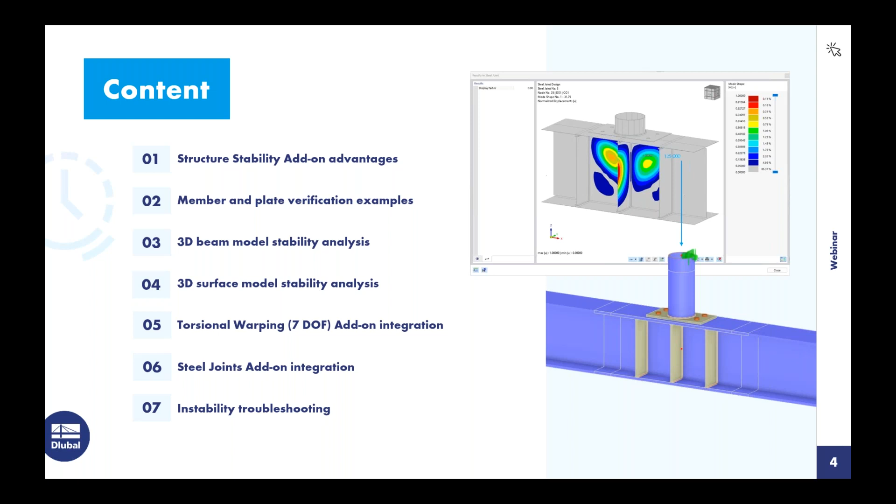So to begin, when looking at the structure stability, this is an optional add-on within the RFEM 6 program. This allows us to run an eigenvalue analysis to determine the critical load factors and eigenvectors, or in other words, the buckling modes of our structure. Therefore, we can evaluate the stability of the structural system in regions prone to buckling. So when we're talking about regions prone to buckling, we're typically referring to very slender beams or columns or thin-walled shell or plate elements.

Now, everything that we'll be carrying out today will be according to a linear eigenvalue analysis, which we'll talk a little bit more about in the next slide, but keep in mind that a nonlinear stability analysis is also available where we can actually increase the load increments to see the failure of the structure. As already mentioned too, not only can we look at the buckling modes of the structure, but we can carry out instability troubleshooting to locate modeling errors with a load-independent eigenvalue analysis.

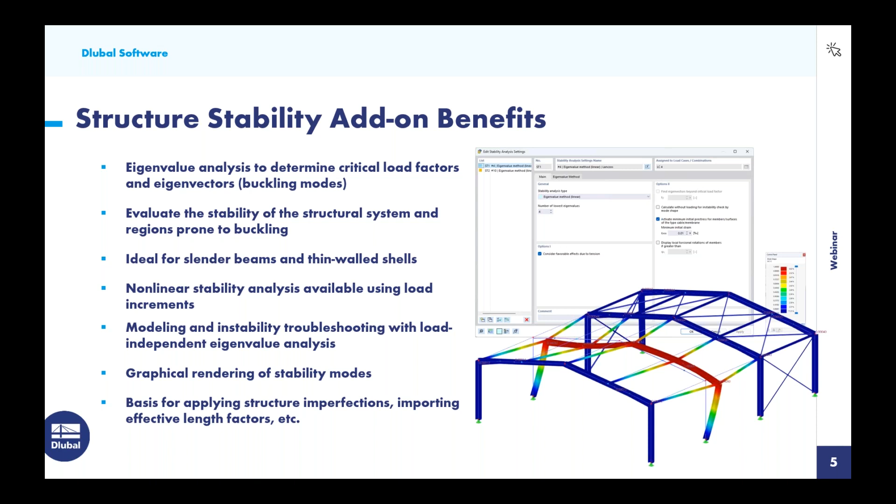Now, of course, through all of these examples we'll see, we'll see the graphical rendering of the stability modes as we see over here on the right-hand side. Then we can integrate for further capabilities within the static analysis, such as applying structure imperfections. We can import effective length factors, and we'll see those carried out in the further design examples.

Now, when we do activate this add-on, we have 3 analysis types available to us. The first is the eigenvalue method, or a linear analysis. This is essentially where the buckling modes are determined through a linear method. If we have any nonlinearities defined, either material or geometric nonlinearities within the model, these are internally converted to linear elements in order to carry out the stability analysis with constant stiffnesses.

Now, alternatively, we do have the incremental method with an eigenvalue analysis. This is nonlinear and will take into consideration all geometric and material nonlinearities. Essentially, we will carry out the failure criteria and nonlinear effects, and these will be included during the incremental loading increase. We will find the last stable state with this nonlinear analysis to carry out the linear stability analysis, or the eigenvalues.

The third option here is the incremental method without the eigenvalue analysis, also nonlinear. This is identical to option number 2 with that nonlinear analysis capabilities. We simply won't carry out the eigenvalue analysis within that last stable state. So with all of our examples today, we will be utilizing the linear eigenvalue method, but keep in mind if you do have those nonlinearities, it's capable within the add-on to also utilize these nonlinear options.

So as we look at this example within RFEM 6, our main base program, we can see this W section profile with the 100 kip load applied at the top, the pin roller type scenario, 12 feet high. We want to activate the structure stability add-on, which we can do within our toolbar by accessing our base data, or by right-clicking on the model name to access that base data dialog box. Under the second tab are all of our available and optional add-ons, and for today we're going to be utilizing the structure stability add-on.

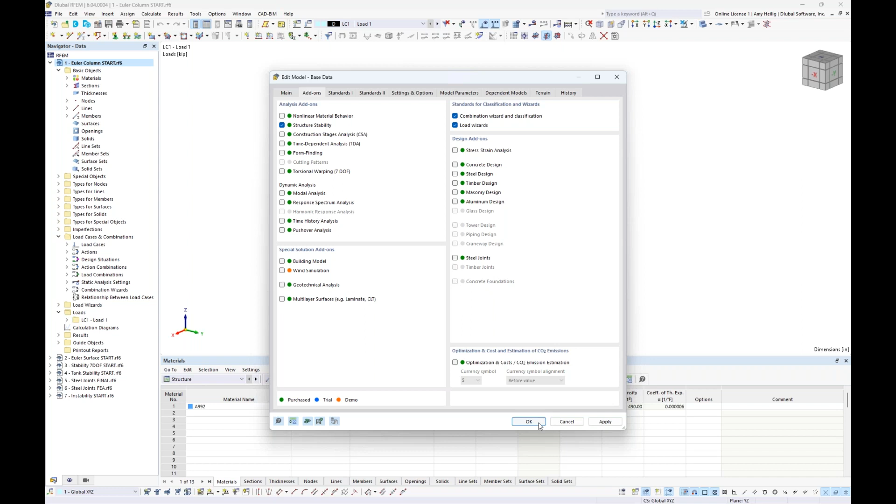When I click OK, pretty much nothing changes within the model itself, but we can go into the load cases and combinations dialog box. I currently only have one load case defined with that 100 kip load applied at the top of the column, and this will be carried out according to a first order static analysis. But we can activate the structure stability add-on with this checkbox down here at the bottom.

Looking at the default definition types, you'll notice there are two definition types immediately set. The first is an eigenvalue method linear analysis, which we should recognize from the PowerPoint. We'll go ahead and carry out that linear analysis for today, and then we can set the number of eigenvalues to solve for. The default is 4, but we could increase or decrease this depending on our model. The second default setting is identical, just with a higher number of eigenvalues set to 10 by default. So carrying out the linear analysis with 4 eigenvalues, we'll go ahead and click OK.

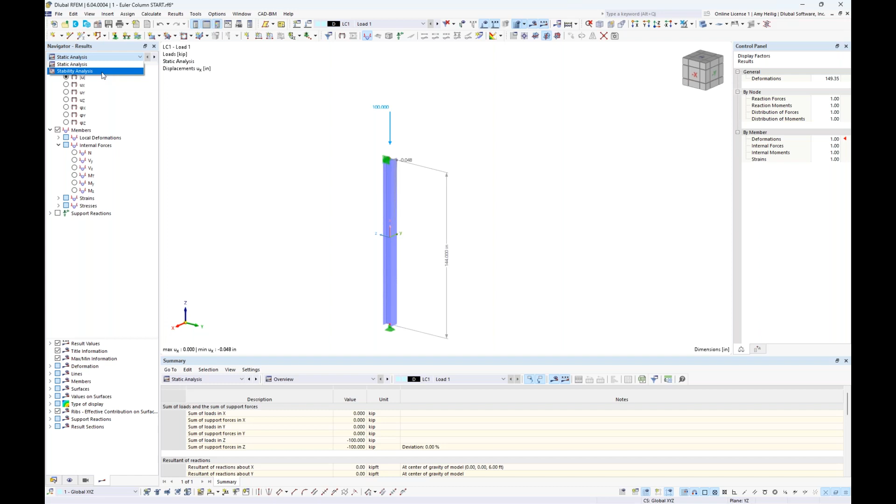To run this calculation, we're going to initially calculate the static analysis with this first load case, but then you'll notice that we carry out the second calculation for the stability analysis. We're not so interested in the static analysis results, but immediately we jump to the stability analysis results that are now available to us in our navigator.

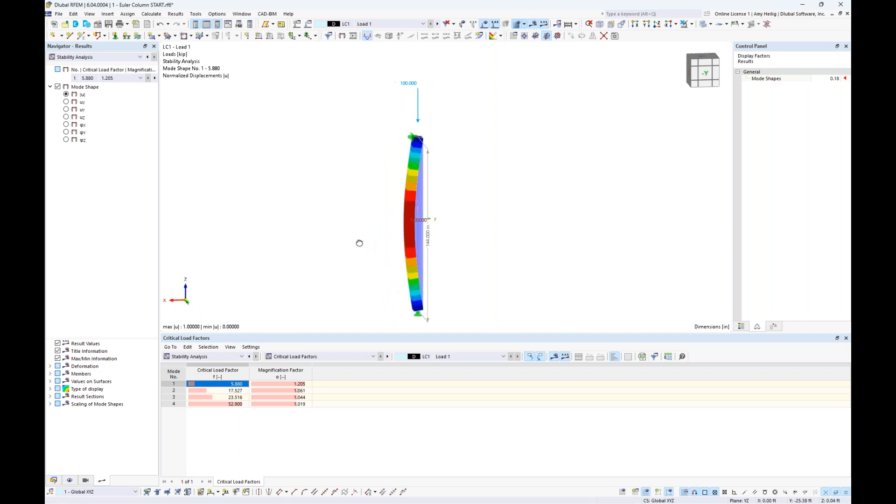When we look at the results for the structure stability add-on, we see 4 different eigenvalues that we have solved for. Within the table, we'll also see the critical load factor given. The critical load factor for this first buckling mode shape, which we can see is buckling out of plane in the weak axis direction, is the factor we can multiply the applied loads by - in our case 100 kips - before we are going to see the structure fail, as shown with this first buckling mode shape. The second mode shape is buckling in the strong axis direction, and as expected, we see a higher critical load factor of 17.527.

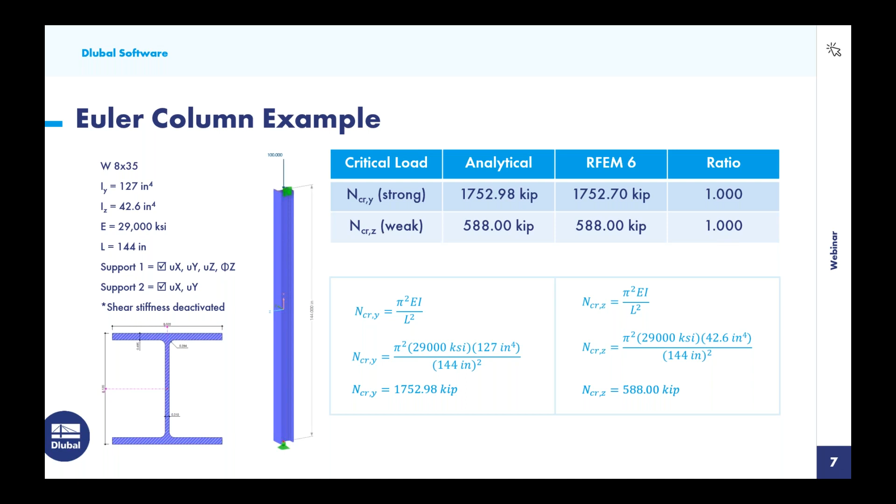Again, we multiply this factor by the 100 kip applied load in order to determine the critical buckling load. So we take this information back to the PowerPoint to compare to the analytical calculations we've carried out within this slide, and we can see that compared to the Euler buckling formulas, the RFEM 6 comparison gives us a ratio of 1.0. I think it's important to understand how we're carrying out this structure stability for simple flexural design here for the stability modes.

Moving on to our second example, this is really very similar to what we just saw with our column, yet this time I wanted to utilize a 2D surface element. Members by default are represented by a single line element. Surfaces, on the other hand, are two-dimensional.

So we go into RFEM here to open up this example. As mentioned, this is a two-dimensional surface, so we have 10 inches wide, 50 inches tall. I have left on the display here the FE mesh, so you can see how the structure will mesh this for this two-dimensional object. We also have a 1 kip per inch load applied at the top here.

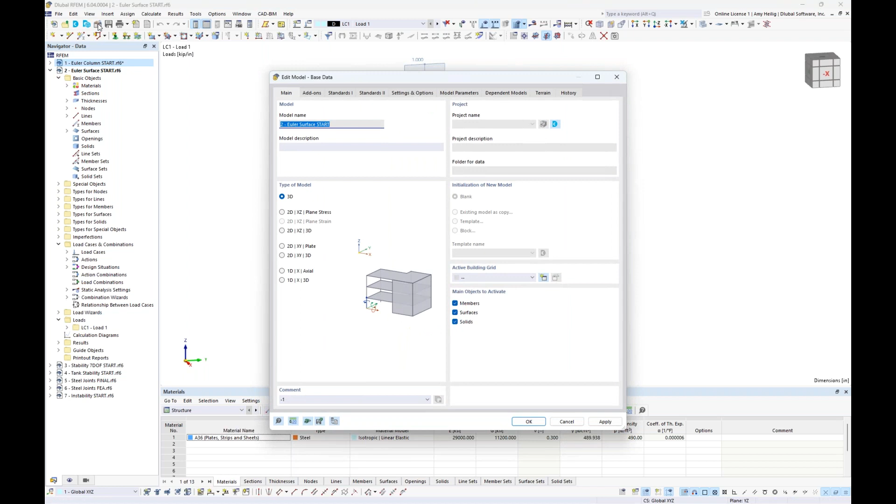So very similar to the column, we want to go into the base data, and we can do so within the toolbar directly to activate, under this second tab once again, the structure stability add-on.

We go into our load cases and combinations. And for this example, we have our single load case here with the 1 kip per inch applied as a line load at the top of this 2D surface element.

We want to not only carry out the static analysis, but also the structure stability analysis. We'll go ahead and leave these default settings here for a linear analysis, carrying out 4 eigenvalues, and we can run this calculation. So the program would initially mesh a structure if we didn't already have it, it will carry out the static analysis, and then we move on to the stability analysis.

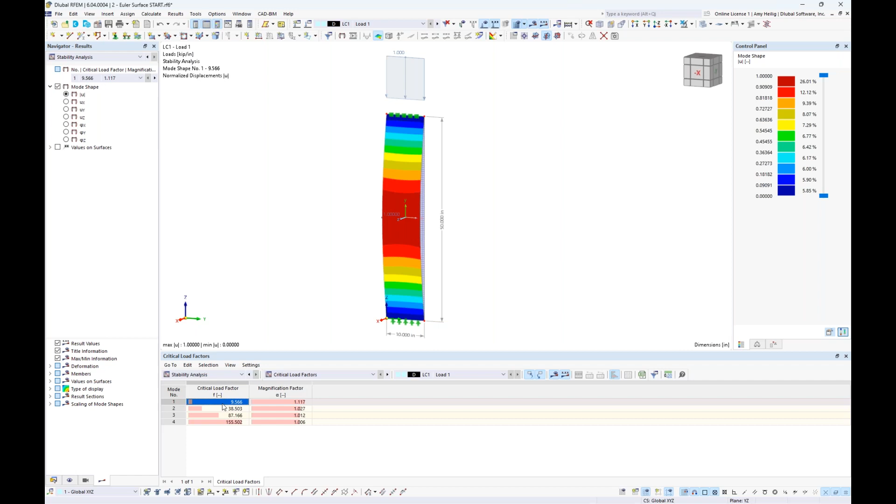So taking a look at our stability analysis results here within our dropdown, we see our 4 different mode shapes. And the first mode shape you can see here is buckling out of plane for this 2D surface element, with a critical load factor of 9.566.

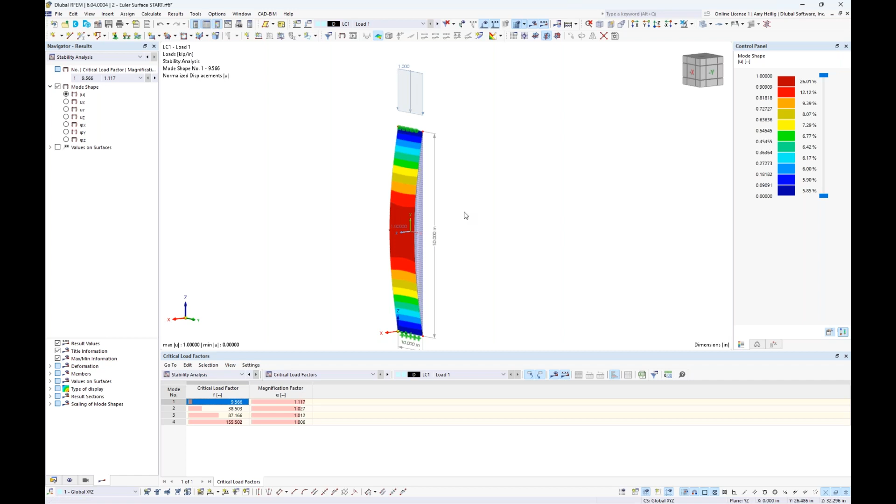So taking a look at these additional mode shapes, we can see here the deflected shape, but the critical load factor here is much higher. So in reality, we're most concerned with the lowest critical load factor. Now again, this is the factor, this 9.566, that we can multiply the applied load here of 1 kip per inch before we would expect to see structure failure, or the buckling here out of plane.

Again, we take this information back to the PowerPoint here to compare to the analytical formula, and we find a ratio of 0.997. Okay, so that should give us a better understanding then of, again, just the basic behavior of this structure stability add-on for a simple beam and a simple surface.

Now let us go back into RFEM here to open up our third example. So this one should be a little bit more interesting, where we have a 3D structure that is composed entirely of beam elements. So you can see that all of these are member elements for our columns, beams, braces, represented by a single line element here. So no surfaces for this particular example.

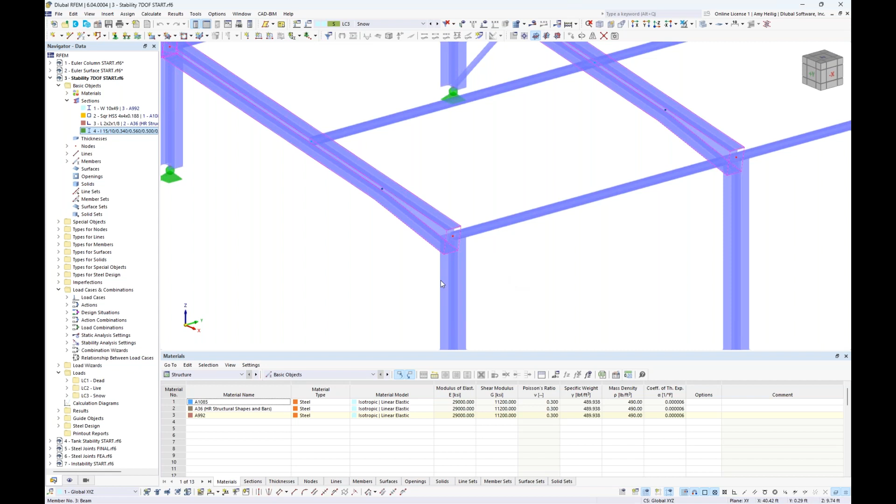If we want to do a quick overview, the cross sections are from the AISC database. So we have W10 by 49s, some square HSS sections spanning between these moment frames, single angles for our cross braces here, lateral bracing. And we also have a very small taper for this beam member, in particular at 25% of the member length before it frames into the vertical columns.

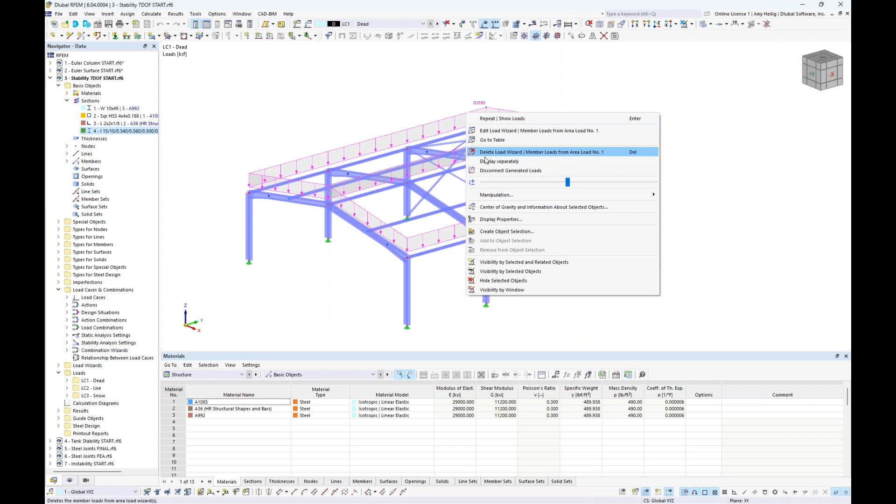Now, to quickly take a look at the loading for this example, I have only 3 load cases defined. So we can view these loads here, and these are just general area loads created with the load wizard for dead load. If we're curious to see how the load distribution looks, we can right-click to display separately, and notice that I have created a one-way area load distribution so that the loads are mainly on these main beams here rather than the HSS spanning in the global Y direction.

We can also view here the live load, same concept. If we want to view the area load instead, we can see this shown here on the structure with a varied magnitude.

And finally, we have a projected snow load in the vertical direction. So for this example, I have applied only gravity loads.

I think it's important to understand that when we're talking about the buckling behavior of our structure, we want to evaluate the worst case scenario where we have the highest compression forces in our members. For example, in our column elements, we want to see the highest forces acting in the downward direction. This is typically with gravity loads.

If we were to include, let's say, wind uplift forces, this is only going to do us additional favors in terms of the buckling behavior, because now we have introduced additional tension forces in those members. So again, when we are evaluating the structure stability, we really want to look at those downward compression, possibly gravity only loads. Okay, so I have additionally combined these load cases into load combinations according to the ASCE 7.

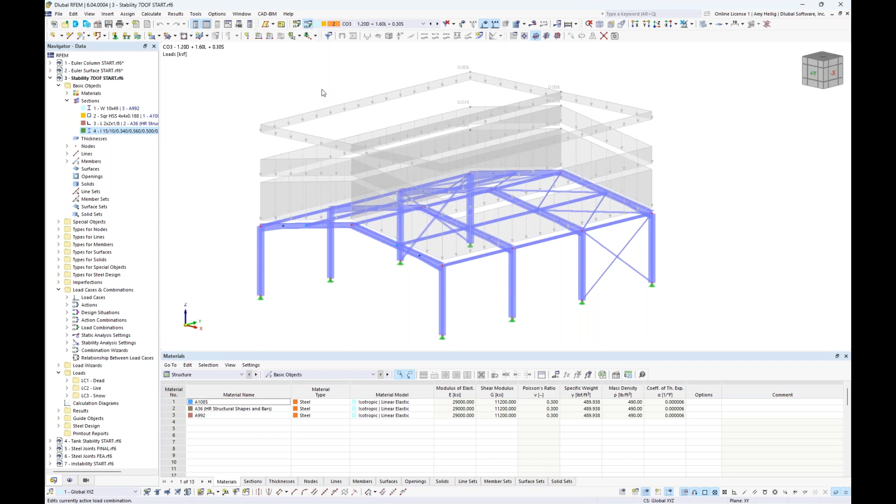We can see those displayed here graphically along with the relevant load factors. I'm going to go into my load cases and combinations. Now, we certainly could activate here the structure stability for each individual load case, as we did in our previous simple examples. But instead, I'm interested in carrying out the buckling analysis for my load combinations instead, where I have combined all the load cases together.

Now, the program by default creates 2 design situations based on the ASCE 7 2022 in this example. You can think of a design situation as simply grouping together all of our factored load combinations. We can see this here, LRFD, according to the ASCE 7, as well as our second design situation, which groups together all of our unfactored load combinations. This will eventually give us an envelope solution for those factored and unfactored load combinations together.

Under the combination wizard settings here, I can go in and you'll notice that everything is solved here for our load combinations according to a second order analysis, but we have the ability to activate the stability analysis here directly within the design situation.

And these default settings are identical to what we saw previously within the load cases, that we can carry out the linear analysis, and perhaps I increase this to 10 different eigenvalues to solve for this structure. So now that I have activated it within the design situation itself, I take a look at the load combinations individually listed out, and I can see now by default that the structure stability add-on is activated here, just because I have activated that checkbox under the design situation itself.

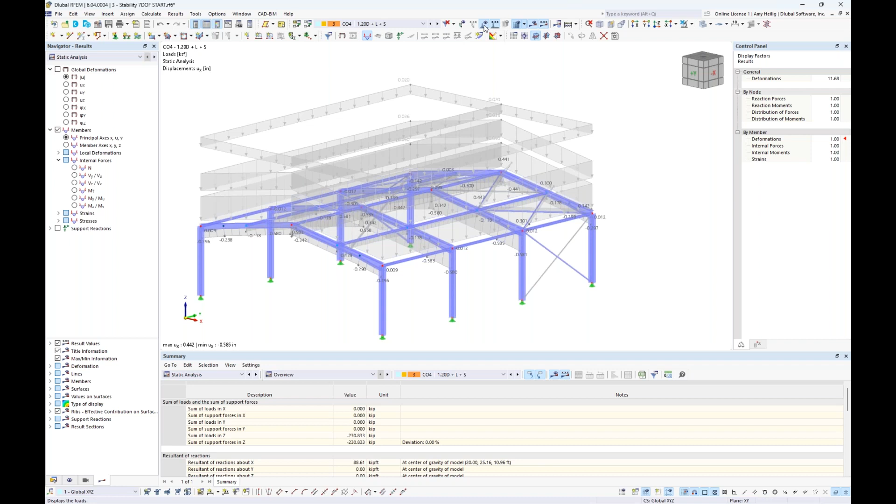So when we toggle this drop down to the design situation for our factored load combinations, again, this is nice because it's more or less an envelope solution for the static analysis. But you'll notice within this table here that shows our static analysis results for this design situation, we have the stability analysis envelope solution as well.

The minimum critical load factor is 10.532, and the controlling load combination is load combination number 3.

So this is kind of nice that, again, we don't need to run each individual stability analysis for each load combination and to manually check the results, but the program will give us the controlling load combination here.

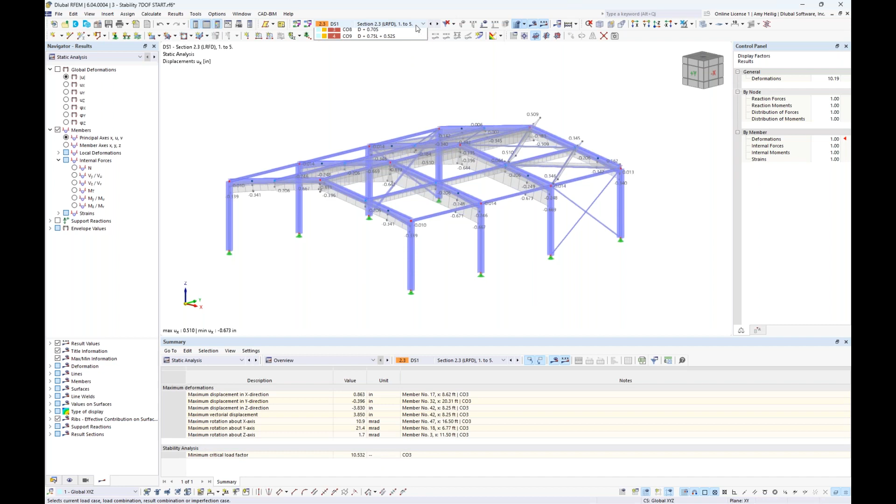So we toggle down just to display the loads for load combination number 3, and no surprise, this is certainly going to be the controlling case because we have all 3 loads activated with the highest load factors to give us the greatest compression forces in our members.

So we will toggle down to the stability analysis results for load combination number 3. As we have input into the program, we had solved for 10 different mode shapes. Starting with mode shape number 1, we kind of see a racking here of this initial moment frame with a critical load factor of 10.532 as we were shown here within the design situation itself. Essentially, we're going to see here the flexural buckling in the strong axis direction of these columns.

Looking at some of the additional mode shapes, we can see similar behavior just in different locations of the structure with a higher critical load factor. As we continue to increase, we may start to see more localized mode shapes. What I mean by this is we see the individual buckling of these columns, in particular in the weak axis direction. Whereas compared to the mode shape before, this is maybe more of a global mode shape that kind of affects the structure together.

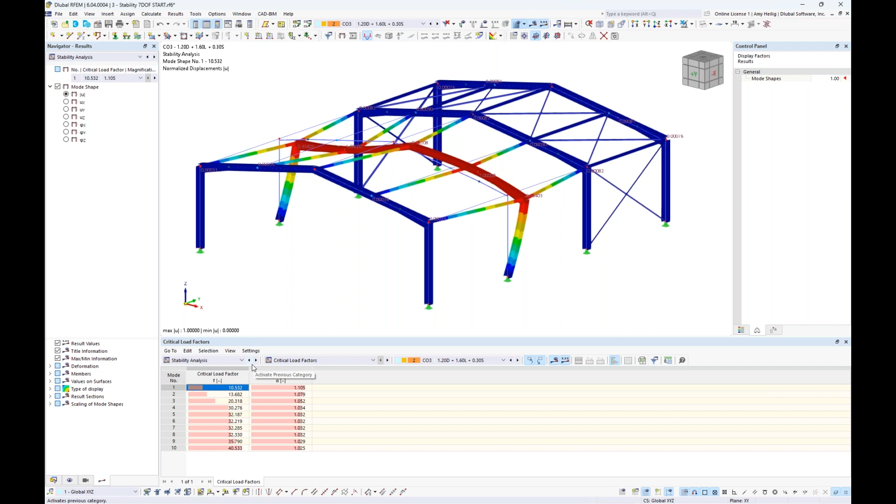Okay, so now that we are looking at mode shape number 1, let us focus in on this particular column here, and this is member number 10.

When we are looking at the stability analysis results within the table, we can use this drop down to view the results by member. So when I graphically click on this member here, the table updates to show me member number 10's results, and we have 10 different mode shapes shown here.

In particular for this first mode shape, where we have failure of this column in the strong axis buckling, we can view the equivalent effective length factor, that K value, which is given as 3.012 in the strong axis direction. We also see here the effective length of 34.64.

So if we plan to take this a step further and design this structure, let's say according to the AISC or the CSA standard, and in particular according to the AISC, we want to design it utilizing the effective length method. The effective length factors are really important, so we have the ability to get that information directly from the failing mode shape here.

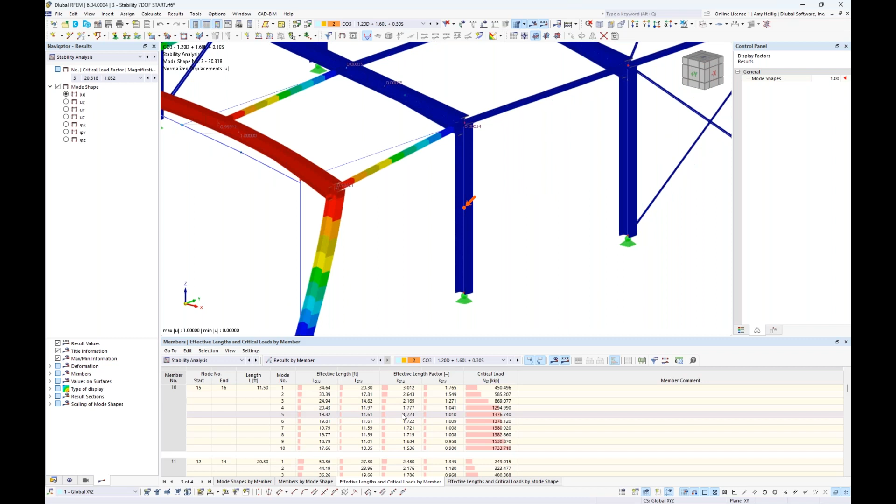Now, when I take a look at these additional mode shapes, they're really not affecting member number 10 until I get down to mode shape number 7. And here we see the failure in the weak axis direction for member number 10. We see the relevant effective length factor in the weak axis direction given as 1.008 and the effective length as 11.59.

So assuming that we have already activated the steel design add-on within RFEM to carry out the steel design according to the AISC, information such as the unbraced lengths or effective lengths are always needed in order to carry out that design. And we do so by inputting in the effective length for the member directly.

And I want to show you a nice feature here that, assuming again that we're carrying out design according to the AISC with that steel design add-on, we input our first effective length definition where you have the ability to import in from the stability analysis.

So when I turn on this checkbox, I get a new tab here where for the strong axis direction, for consideration of, if we go back here to the main tab, flexural buckling about the major axes, we can import in that effective length factor directly from the stability analysis.

So we choose here load combination number 3. We will choose mode shape number 1, and we can either graphically select member number 10 or choose it here within our dropdown, and notice that that effective length factor is automatically brought in as 3.01.

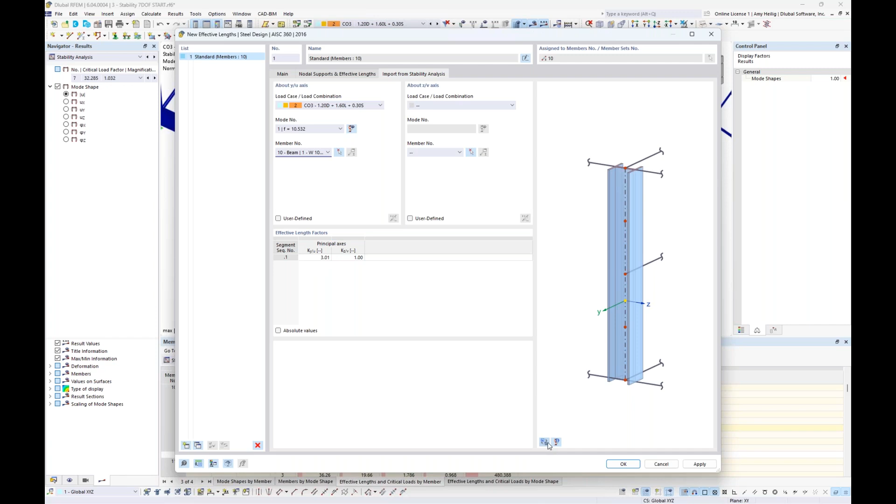We can do the exact same thing for the weak axis direction. Again, this is specific for member number 10. We will choose load combination number 3, but this time we want to choose mode number 7. Remember, that was where we saw this column fail in the weak axis buckling direction, again for member number 10.

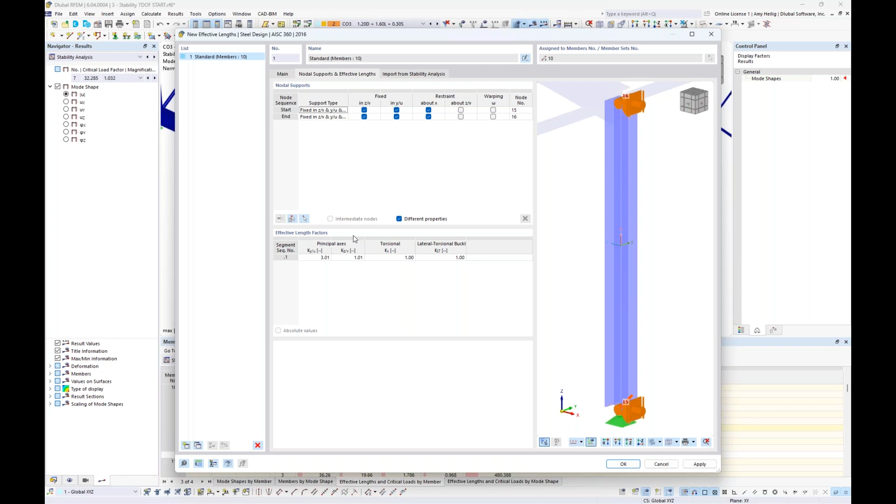And we see that effective length factor brought in automatically as 1.01. So we don't need to do anything further here in terms of the effective length definition for flexural buckling in the strong and weak axis direction if we integrate this with the structure stability add-on.

Okay, so now that we have covered the basic stability mode shapes here, keep in mind that everything we have seen so far has been based on 6 degrees of freedom. And with 6 degrees of freedom in these various mode shapes, we notice that we're really only able to consider flexural buckling. We certainly can see this with the mode shapes directly, with flexural buckling failure of the columns themselves.

But if we back up a step to look at the static analysis results, or the internal forces from load combination number 3, what we'll actually see here is that we have pretty high bending forces along the length of our members. And when we look at our columns, we have pretty high axial forces, of course. When we're talking about these bending forces, for example for these beams, this should immediately flag us that possibly lateral torsional buckling is an additional stability failure state that we need to consider.

So let us go back to the PowerPoint here to discuss these different stability failure modes. Now, we should be very familiar with flexural buckling by now for our members. Ultimately, there's some critical buckling load for the strong axis and the weak axis before we see this member fail with flexural buckling.

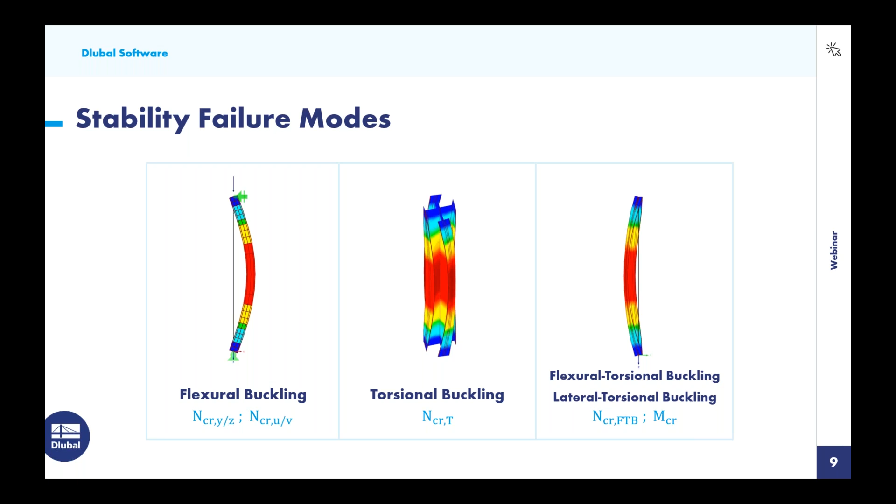Now, if we're designing according to AISC or CSA, those codes have analytical equations that design for these additional stability failure modes. But this is in the design process. What I'm talking about specifically is the static analysis as well as structural stability. So how do we consider these additional failure modes? The answer is to enable the 7th degree of freedom, or warping.

We have an additional add-on within RFEM 6 called Torsional Warping 7 Degrees of Freedom. This allows us to consider cross-sectional warping with an additional degree of freedom for member calculations. What's nice is that everything is integrated automatically, including both the static analysis and the structural stability add-on, to determine additional member critical load factors and mode shapes.

So again, 6 degrees of freedom can only consider flexural buckling failure—that's everything we've seen up until now. I did want to note that with 6 degrees of freedom, the load application is always at the member shear center. So now when we enable that 7th degree of freedom, we can additionally capture torsional, flexural torsional, and lateral torsional buckling behavior. And when we enable that 7th degree of freedom, we get a load application at the center of gravity, or centroid, of the member instead.

What we'll see in just a minute is that when we enable this add-on, we get additional options available, such as member transverse stiffeners to restrain the warping along the member length. Now, currently in RFEM 6, the 7 degrees of freedom is not linked in the steel design add-on when carrying out steel design according to AISC or CSA. It is currently linked for Eurocode only. We do plan to link those in the future, but currently the full static analysis and structural stability can easily consider the 7 degrees of freedom, which we'll see in just a minute. So keep that in mind if we're taking it a step further with the steel design add-on.

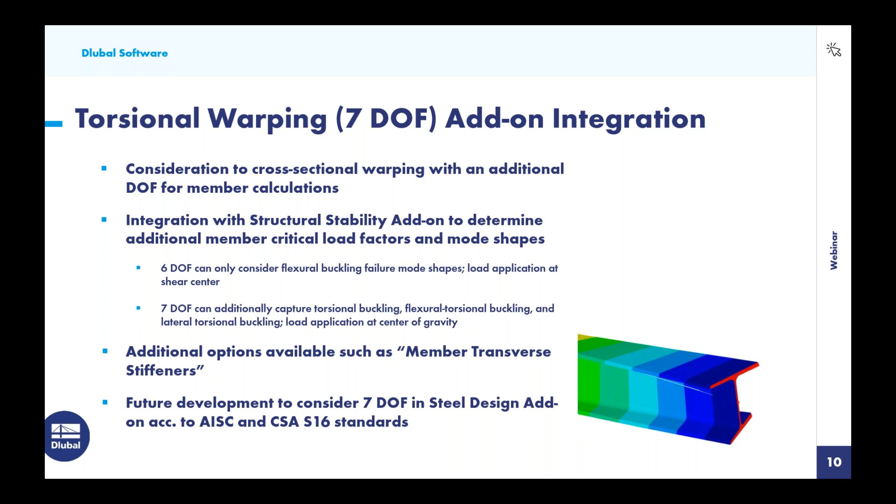Okay, so what we'll do here is go back to the RFEM model and go into the base data. Under the second tab, we'll activate not only the structural stability, but the Torsional Warping 7 Degrees of Freedom. When I do this, the program says it needs to delete the results, of course, because those were all based on 6 degrees of freedom.

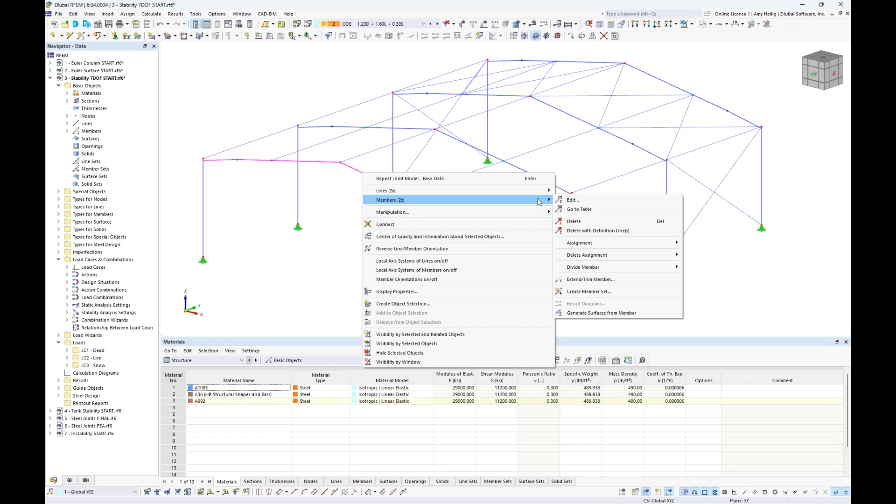Now, by default, all of our members are considered free to warp—there is no warping restraint along the member length. In addition, if you'd like the warping internal forces to be transferred to adjacent members, it's important to create what we call a member set. So if we want the warping forces with the 7th degree of freedom to be transferred from, say, our beam on the right over to our beam on the left, we'd need to hold down the control key to make sure both are highlighted. We right click, and under the member option, we have the ability to create a member set. That's simply grouping those members together so the warping internal forces will be carried out to adjacent members.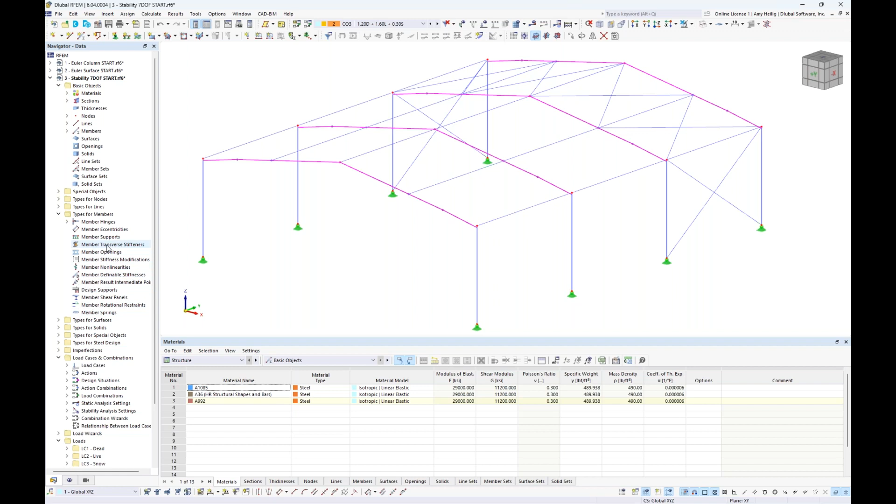Now, circling back to the warping restraints, we should see under types for members a few additional options, including member transverse stiffeners. I'd like to double click on this to create a few stiffener types for these members in order to restrain the warping at the member start and at the member end. And within this dropdown, we actually have several different stiffener types.

For example, we can choose a flat plate where we could input the material and dimensions, and the program will automatically calculate the warping spring to be considered within the analysis. For today, we will use the option at the bottom called warping restraint, where we'll use the full warping restraint and apply this to the member based on a certain percentage of the length.

I'm going to activate this warping restraint at 0% of the member length, at the member start. And I'm going to add a second warping restraint at the member end, so 100% of the member length. Then we can graphically select which members we would like to apply this warping restraint to.

I'll use my selection box graphically here to select all of those main beams. I click OK, and once I click OK through this dialog box, you'll notice we get a nice symbol shown here representing where that warping restraint is located at the member start and member end.

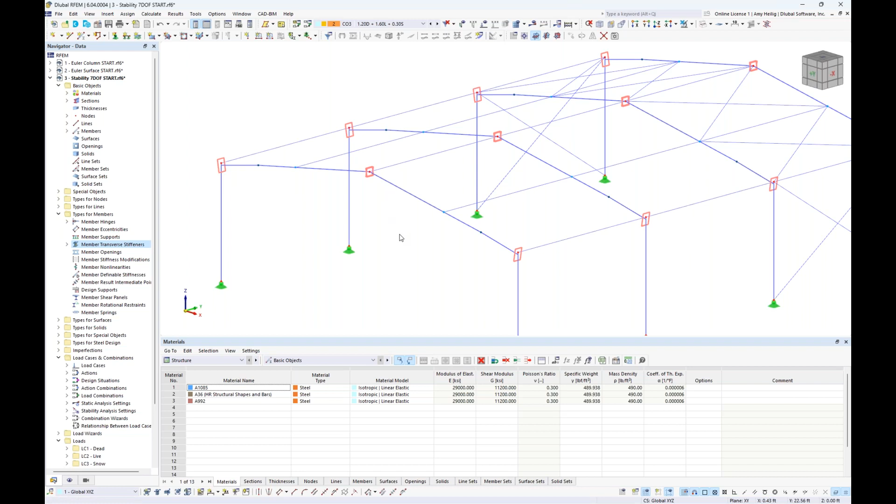Now we want to go to Calculate All, and we have to rerun the static analysis with 7 degrees of freedom. We see the load cases carried out, as well as the load combinations according to a second order analysis. Then we run through the structure stability again for all load combinations, and we should see slightly different results.

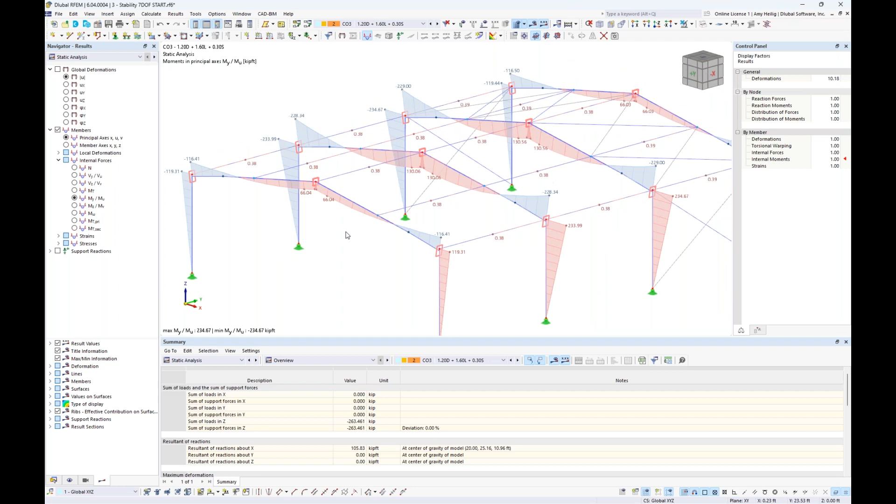Taking a look at the static analysis results, which we can view as the internal forces of our members, you'll notice we have a few additional options now with that 7th degree of freedom. For example, we can view the warping moment along the member length, or view the primary torsional moment and the secondary torsional moment. This previously was not available with 6 degrees of freedom.

Toggling down to our stability analysis, we also should see pretty significant or different results here. No longer do our 10 different mode shapes look like what we previously saw with 6 degrees of freedom. We see here the critical load factor is now 4.564, and our relevant mode shape is really focused on these columns.

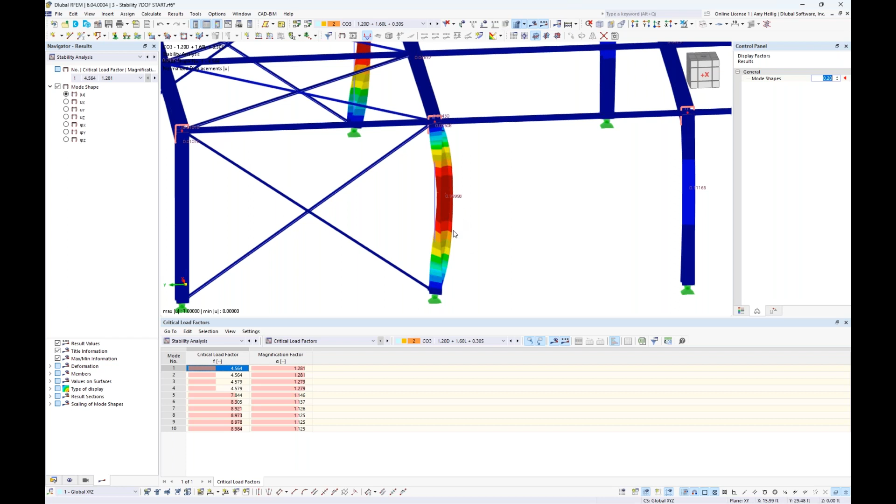We can increase the size of this mode shape ever so slightly to see how this column has essentially flexural torsional buckling, where it is both bending out of plane but also twisting about its own axis. So you can see the critical load factor has significantly decreased. Previously it was around 10.5, and now it's only 4.564 for the relevant mode shapes here.

Now, when we look at these first four mode shapes, it's really flexural torsional buckling of these columns, but then we get into mode shape 5 with a critical load factor of 7.84, and this is where we begin to see lateral torsional buckling of those beam elements themselves.

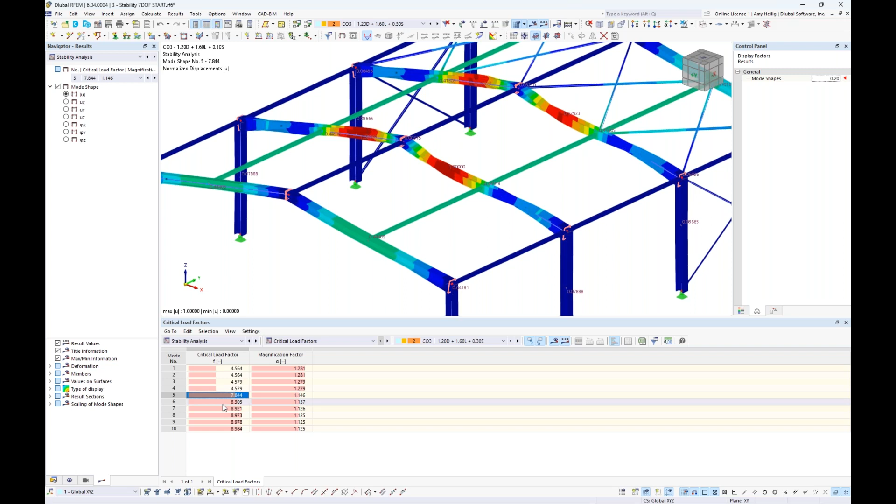So again, when we are carrying out 6 degrees of freedom, if we're only concerned with flexural buckling, no problem, the program automatically considers this. But if flexural torsional buckling, lateral torsional, and torsional buckling are also a concern, then we really would want to consider enabling this 7th degree of freedom. This should give us a pretty broad overview now of member stability design.

I now want to move into our next example to talk about surfaces. You'll see here that I have a tank model, and everything is composed of 2D surface elements. The tank wall is a surface element, as we see here, as well as the tank roof.

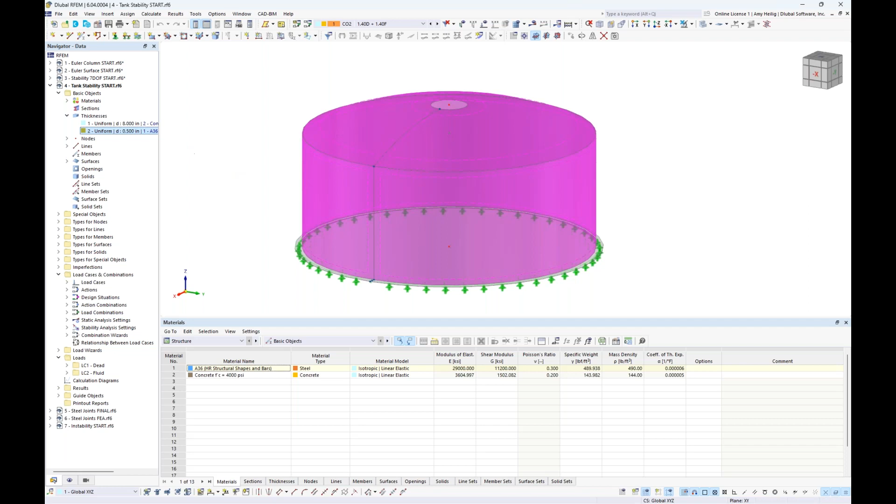To talk a little bit about the thicknesses and materials, the entire tank wall and roof are going to be comprised of 1/2 inch thick A36 steel material. And then at the bottom here, we have an 8-inch concrete slab, 4,000 PSI concrete.

I did want to point out that this structure was entirely created using our block options here in the toolbar. When you take a look at the various block options, you'll see all the different categories for the different structure types, including silos and storage tanks.

Within these options, as I cycle through them, you'll see all of the various options. If I double click here, I have the ability to define the dimensions, the material, and even some loading capabilities are automatically created. That is how this example here was created automatically.

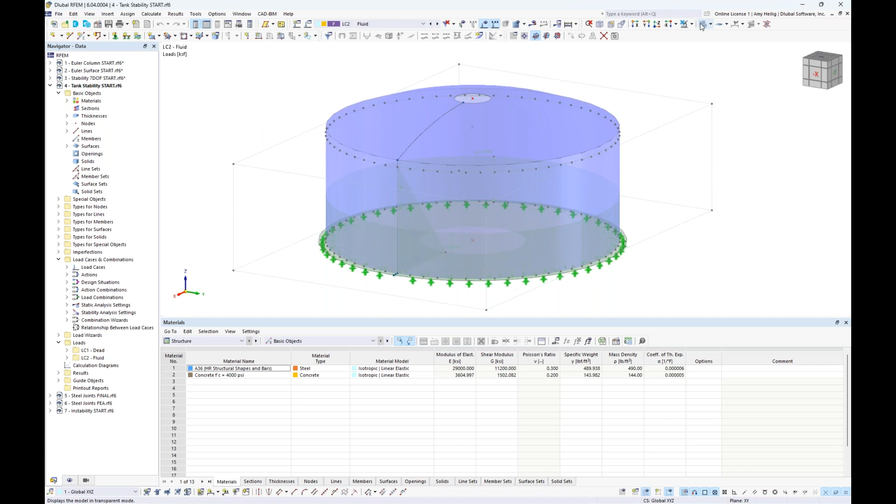For this example, we have only 2 load cases. We have a simple dead load where only self-weight is active, so no additional loads apply to this tank structure. We also have this fluid load, which was automatically created with the block import option to represent fluid inside the structure acting with outward pressure against the tank walls.

I've left this with only these 2 simple load cases because for load case number 2, the fluid load, we get significantly high compression forces in our tank wall, so we need to carry out the buckling analysis.

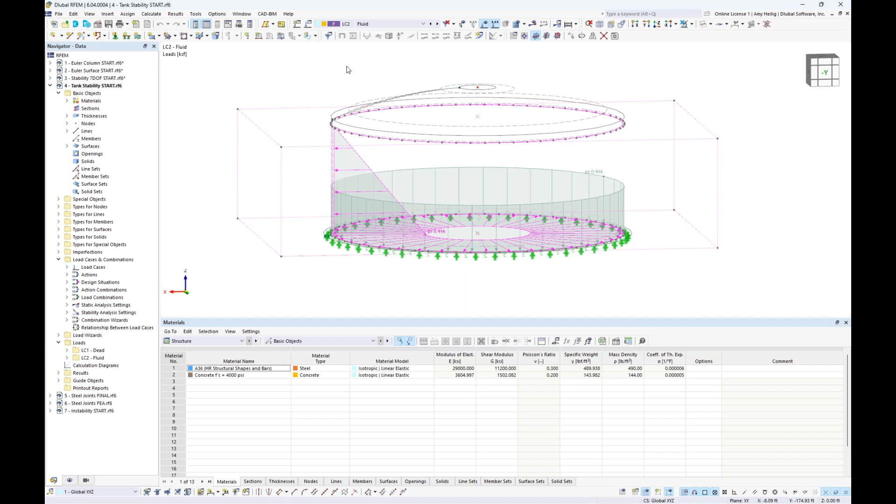So I want to go into the load cases and combinations dialog box, and we want to carry out the structure stability analysis here. A linear analysis with 4 different eigenvalues is fine for this particular load case, the fluid load. When I calculate this, the program will generate the FE mesh for our tank, run through the calculation for the static analysis, and then run through the structure stability analysis for those 4 different eigenvalues.

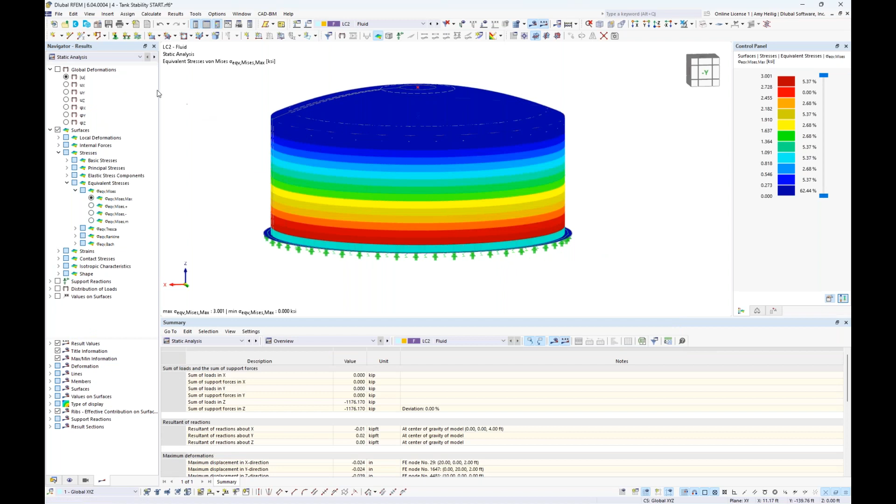Once this is done, we will see under the stability analysis the relevant buckling shape. I'm going to create a user-defined visibility here for only the tank walls, so we can see this in a clearer form. We have 4 different mode shapes that we've solved for.

Notice that the critical load factor is quite low here, at 2.882, and we see the relevant buckling mode shape - localized buckling modes all around the circumference of our tank walls. When I look at these additional mode shapes, the critical load factor is almost identical, around 2.8 or 2.9. Just notice that the location of these buckling modes has changed ever so slightly.

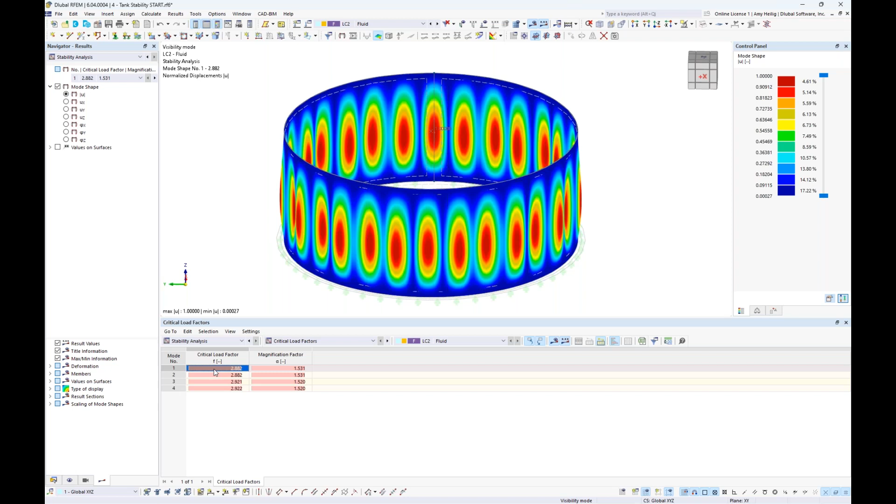So when we back up a step here to look at the structure in general, everything that we model in an FEA software is considered perfect. What I mean is that everything we've modeled considers that the manufacturing process is perfect, that when we install this structure out in the field it is perfectly aligned. But we know in reality that's never the case - there's usually some type of imperfection with the manufacturing and/or installation of these structures.

When we refer to the various codes, there are ways to consider these imperfections, and one of them is to outright directly model the imperfection in our FEA model. So I'd like to show you now how we can directly model these imperfections, integrating it with the structure stability and that first buckling mode shape.

When we go back to the navigator here within RFEM, you'll see an option within the folder called imperfections. It should be known that imperfections is one of the available options in the base program - you don't need any additional add-on for this. What we can do here is create a new imperfection case, and under the imperfection type, we can choose buckling mode.

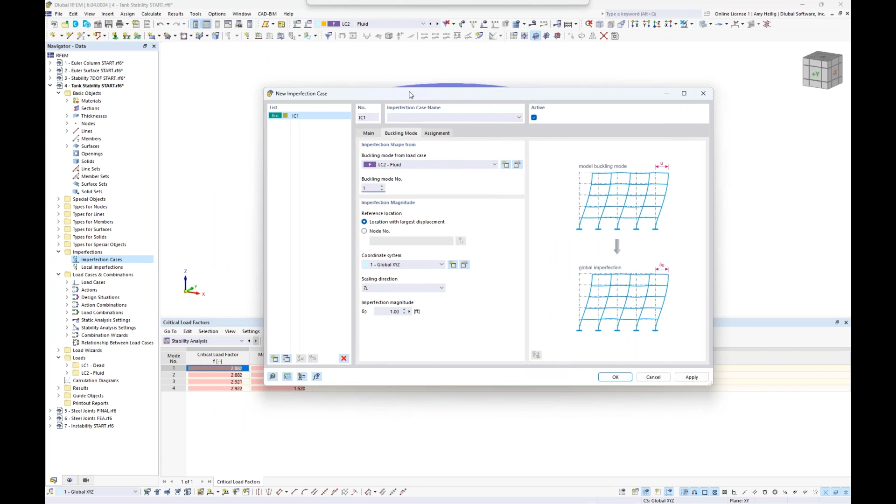What we can do is either select a load case or a load combination. If you remember, we carried out the stability analysis for load case number 2, that fluid load, and we can choose the relevant mode number 1. We can deform the mesh by scaling that mode shape, and we see here the imperfection magnitude options down at the bottom where I can import that buckling mode and scale it based on the X, Y, or Z directions.

Now for our case, we have a round structure that's not necessarily in these global X, Y, and Z directions. So for this we also have the spatial option, where I can tell the program to scale that buckling mode shape to a specific value that I input here. So we put in something quite small, like 0.03 feet.

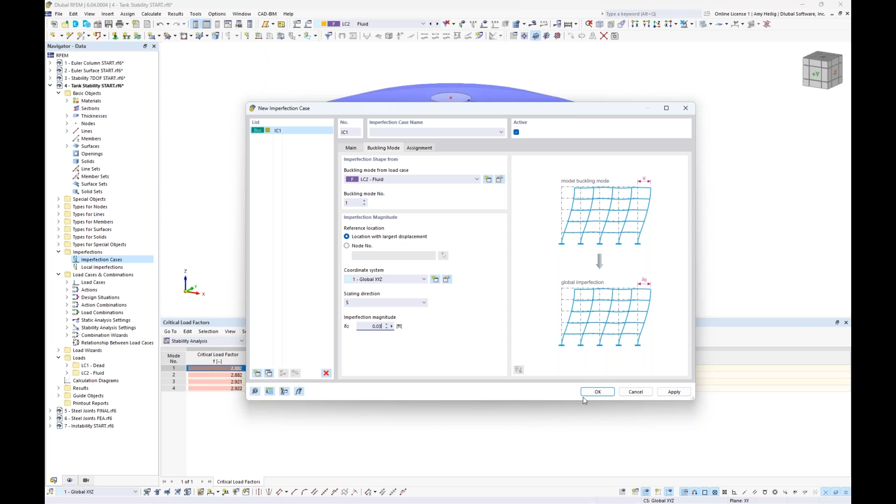So what I'm trying to replicate here is, let's say, a manufacturing defect where we know that this tank wall isn't going to be perfect. So I'm going to deform the FE mesh before I apply any additional loads to carry out the static analysis.

Now that we've created this imperfection case, we're going to go back to our load cases and combinations dialog box. Under the design situations, we should be familiar with design situations - we go back in here to edit the definition type. Remember, we're carrying out a second order analysis, and we previously activated the stability analysis, but here you'll see an additional checkbox option to consider the imperfection cases. This is typically, by default, always checked on.

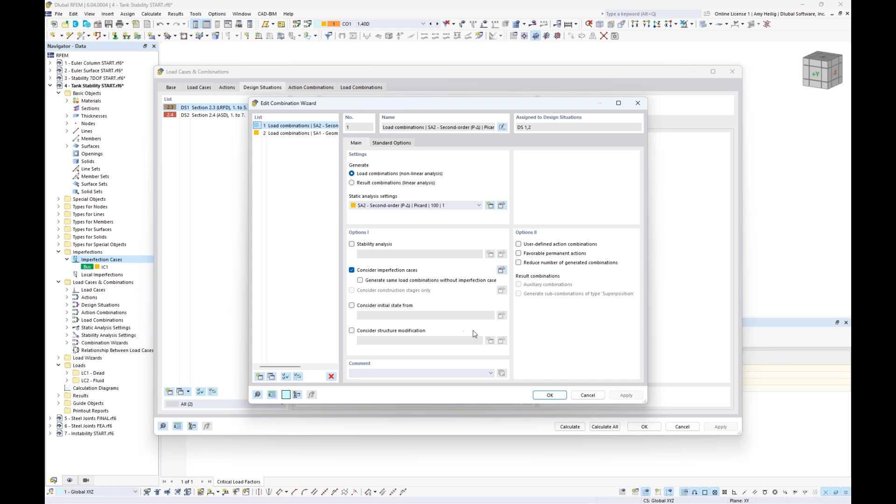So now when we go to our load combinations individually listed out, we see this imperfection automatically considered. When we take a look at load combination number 2 here, we are going to first deform the mesh based on that buckling mode and the scaled magnitude that I had put in.

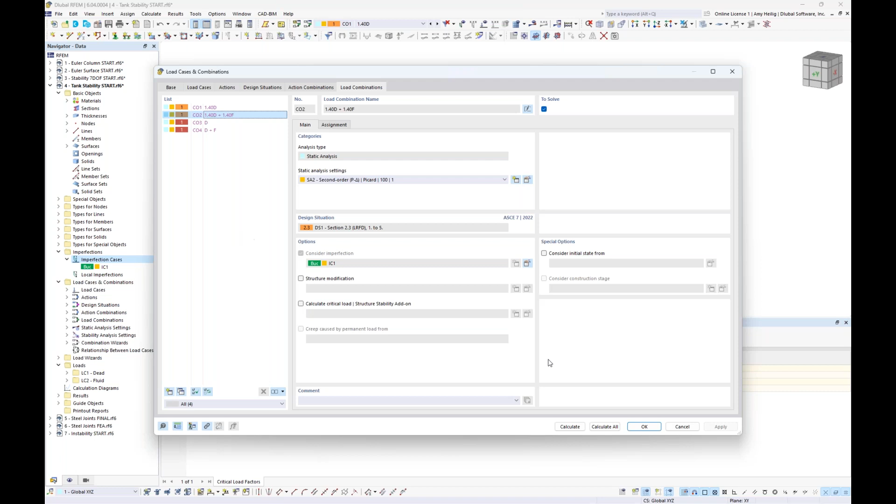Then we're going to apply the static loads, dead load and fluid load, to give us a full static analysis result. So we can calculate everything to see what our results look like with this imperfection now considered. The program will carry out all of these load combinations with that imperfection considered according to a second order analysis.

Currently I am looking at load combination number 2, which is dead load plus fluid load. When I look at my deflected shape for the static analysis—not the stability analysis, but the actual static analysis—we see the deflected shape replicate those imperfections where we have directly modified that FE mesh.

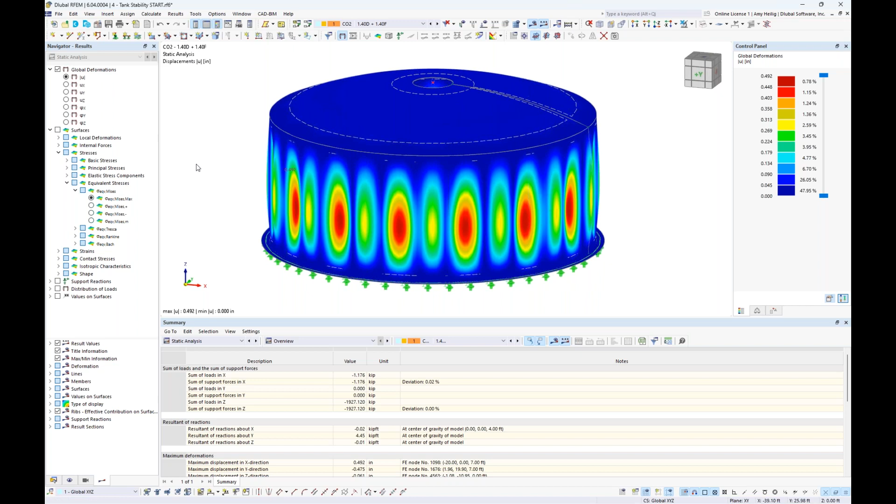In addition, we're probably also interested in the surface stresses, so we can activate the von Mises stresses under our surfaces option. Because of that deformed mesh, we're going to see slightly higher stresses at these particular locations where that deformed mesh is also applied.

So these imperfections can be really powerful when integrating with the structure stability add-on to outright model the imperfections, not only for surfaces, but also for members.

Jumping to our second to last example, I am going to focus on a much smaller scale for the structure stability. Now I'd like to turn to talk about steel connection design according to the AISC.

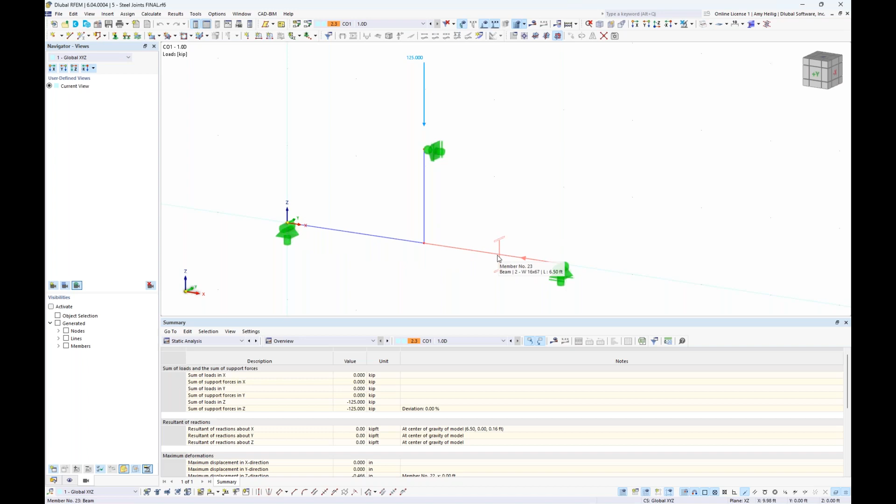You'll see here that I have a very simple model, carried out entirely with one-dimensional members. If we turn this into wireframe view and then back to rendered view, what we have is a simple W cross section for our beam at the bottom, and a vertical pipe member framing into this beam with a point load of 125 kips.

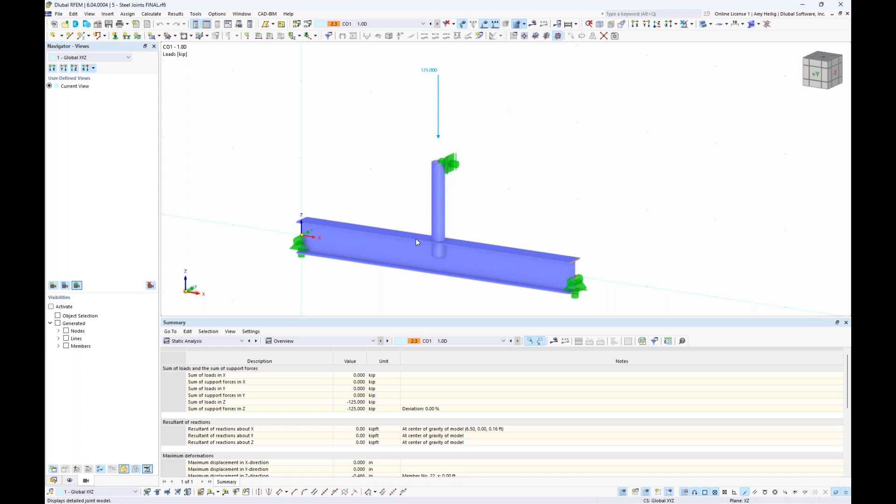I have activated our steel joints add-on, which allows us to carry out the connection design according to the AISC. I've already input all the information for this particular node where these members intersect, and we can graphically see some of those components. I previously did another webinar devoted entirely to steel joint design, so I'd refer you to that on our website and YouTube channel, since we won't be able to cover everything in just a few minutes here.

The powerful thing about our steel joints add-on is that it creates an FEA model underneath the hood, meaning any connection is possible. We are not just limited to standard connections carried out with analytical equations—this is a pretty non-conventional connection, and that FEA model is created underneath the hood to carry out the AISC design.

What else this allows us to do, which you'll see under types for steel joints, is that I actually have 3 different scenarios for this connection design. If we go into the steel joint directly, my first scenario is considering the connection with no stiffener plates.

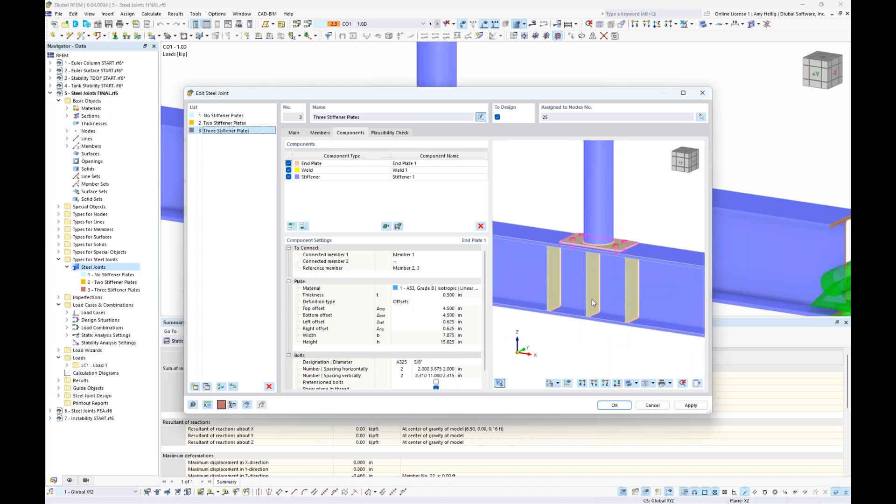We just have an end plate connected by bolts to the top of the beam flange, with our pipe member welded directly to that end plate, but no stiffener plates. Then I created a second scenario to compare, where we have applied 2 stiffener plates at the left and right of that end plate. Then I created a third scenario where we have a third stiffener plate applied right at the center, where that pipe is framing into the W section.

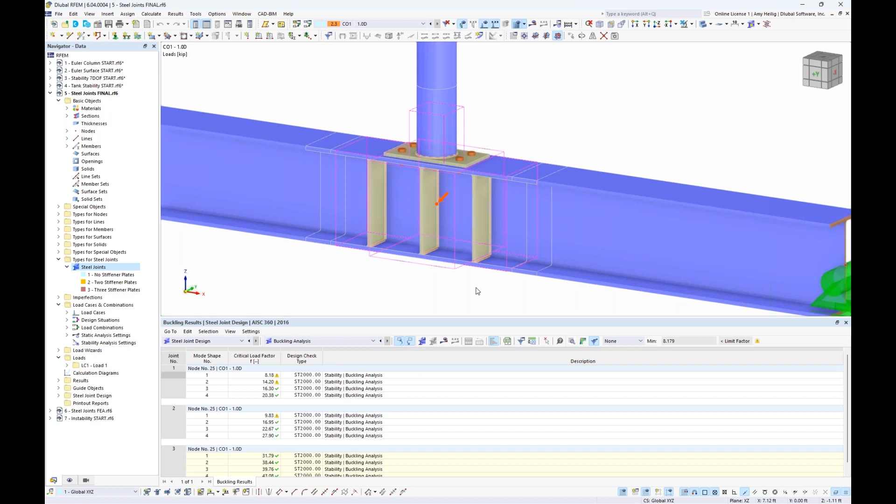When we carry out the design, we'll go ahead and open up the saved results, which give us full design of the bolts, welds, and plates according to AISC. We also have the ability to integrate with the structure stability add-on to carry out the buckling analysis of this connection. For these 3 different scenarios, looking at my buckling analysis results, the critical load factor for the first scenario, no stiffener plates, is given as 8.18.

If we're further interested in seeing the buckling shape without any stiffener plates for this connection, we can go ahead and activate this option in our toolbar to view the results in the steel joint.

So I can scale this mode shape slightly where we can see this FEA model that was generated underneath the hood, and the actual structure stability analysis was also carried out so that we see that buckling of the web is a concern for this particular connection.

Now moving on to the second scenario where we have 2 stiffener plates, we'll notice here that the critical load factor is slightly higher at 9.83. And we'll take a look at the mode shape here, considering 2 stiffener plates. Again, still a concern of the web buckling in between these 2 stiffener plates at the left and the right.

Finally, we have our third scenario where we've added in this third stiffener plate, also shown here graphically. You'll notice that the critical load factor jumps immensely to 31.79. So again, we can multiply our loads by 31.79 before we need to be concerned with any type of buckling with this connection design. And what you'll notice with the deflected shape here is that the stiffener plate itself is actually going to buckle before the web element does.

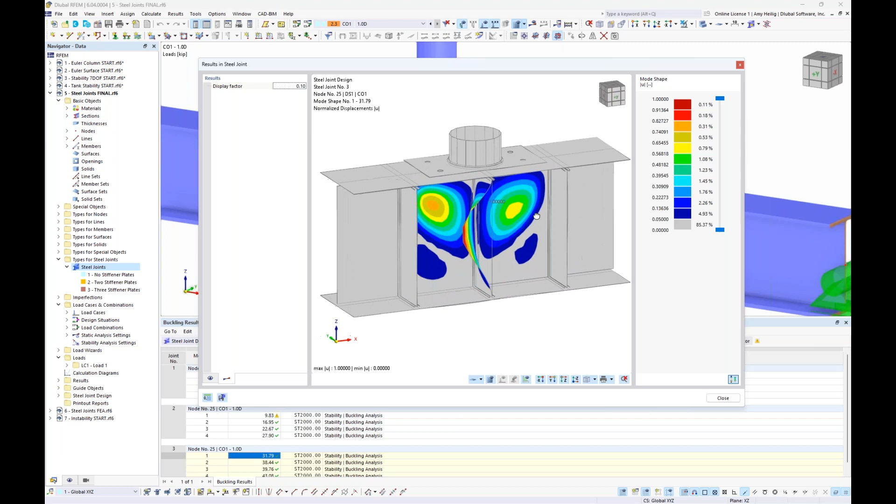So again, just these three different scenarios that allow us to see the buckling behavior integrated with that structure stability add-on. When you own both the steel joints add-on and the structure stability add-on, you by default have all of these results available to you. You also have the option in the lower left-hand corner to save the steel joint model.

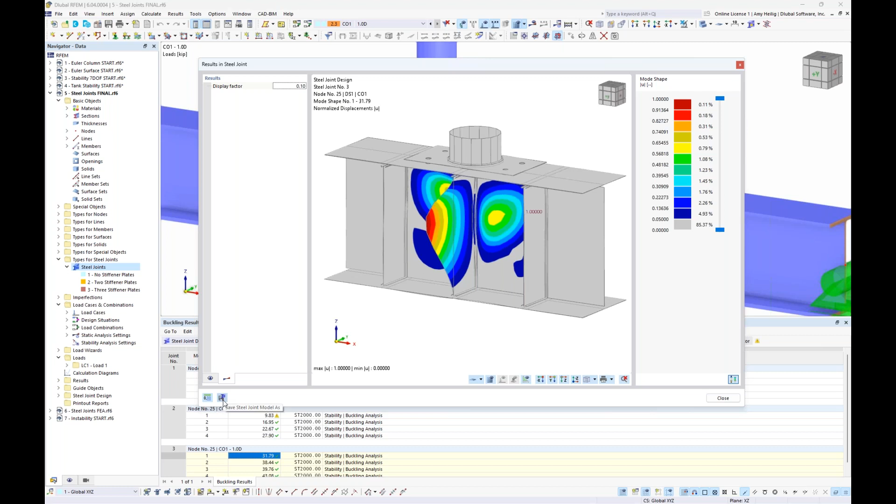And what this means is that the program's creating this 3D FEA model underneath the hood. So I went ahead and saved that just to show you what's going on in the background. The bolts, the welds, all of the plate elements are created automatically by the program with this FEA model that you see here, in order to carry out the connection design.

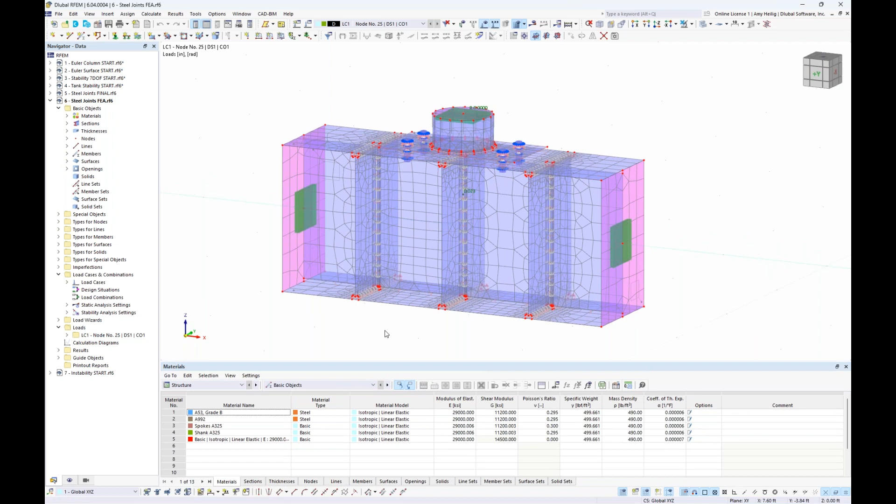In addition to AISC design, we're carrying out the stability analysis. Every example that we've seen up until now is the same workflow going on underneath the hood, where we can view under the stability analysis results 4 different eigenmodes, the critical load factor of 31.792 before we see the buckling of that stiffener plate, and also the relevant mode shapes here with slightly higher critical load factors. So again, we start to see concern for the buckling of these web elements. Pretty unique and powerful about what's going on underneath the hood for any connection type because of the ability to generate this FEA.

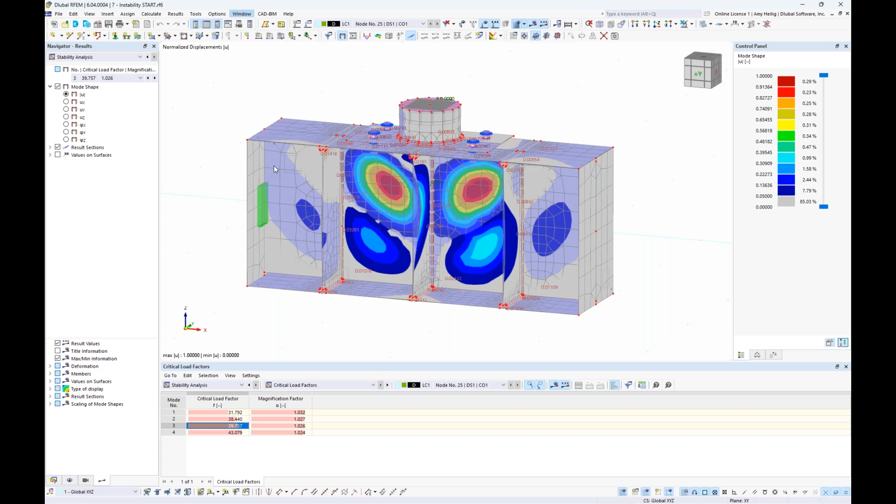All right, so the final thing that we want to go over here is instabilities. So we'll jump to our last example. No longer are we going to focus in on the structure stability or the mode shapes of our structure, but let us turn to the topic of instabilities.

And instabilities are not unique to RFEM. They happen in any FEA program. The question is, do you have the necessary tools to help you investigate where these instabilities are coming from? The structure stability add-on can be incredibly helpful with this topic.

So we have here just a general steel structure, modeled with all beam elements, and these come directly from the CSA standard this time with W250 by 80 steel shapes here, some HSS members, and so on. I also have some various applied loads. We'll see the dead load applied here is an area load. We have snow load, and then we also have a couple wind loads in the global X direction and the global Y direction. And all of these are combined into load combinations here according to the NBC standard.

So again, not really focusing on the stability design. I just want to carry out the static analysis of the single dead load case. And by default, load cases are run according to a first order analysis. So I go ahead and run this calculation.

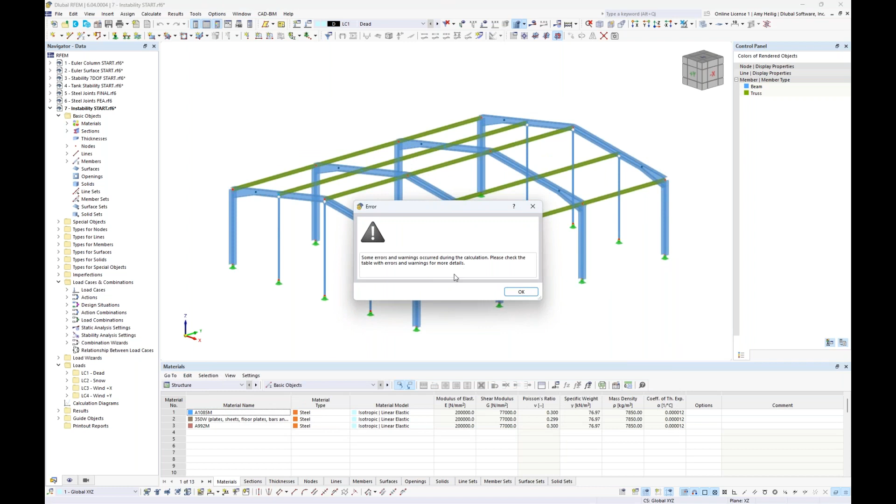And what we find with this first order analysis is our first instability. So we get a warning message in the program. And when we take a look at the table results down here, it tells us the stiffness matrix is singular. The structure is unstable in the direction of the global y-axis.

Now, this red arrow here can certainly be helpful in a lot of cases where we maybe have a modeling error. If it's something a little bit more of a global instability, this red arrow is really just pointing to a single FE mesh point anywhere on the structure, so may not be as helpful in those cases. If we have ruled out any modeling errors and we're really unsure why we're getting this instability, what we want to do here is go back to our load cases and combinations dialog box, just like what we've previously done to activate the structure stability add-on.

This time I'm going to go into the default settings to modify this, to calculate this eigenvalue analysis without loading, for an instability check by mode shape. So, load independent eigenvalue analysis. When I click calculate here for load case number 1, the static analysis, we're sure enough still going to see that instability. But we will also see the load independent eigenvalue analysis run.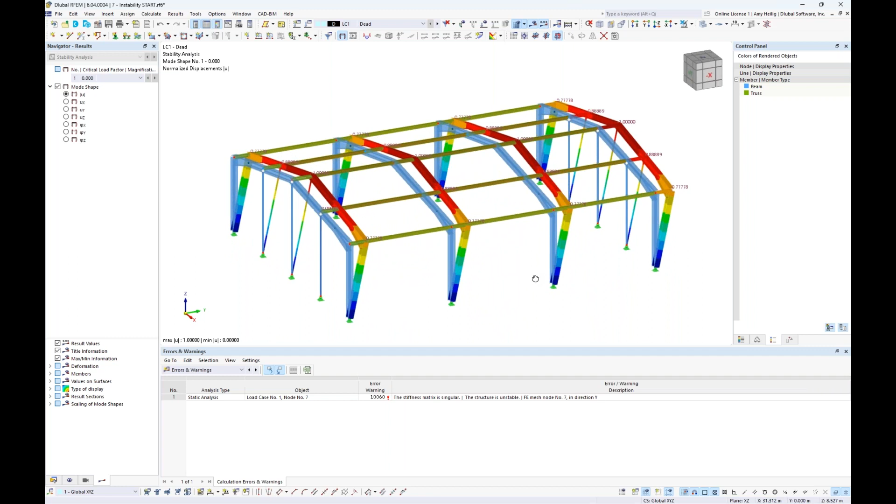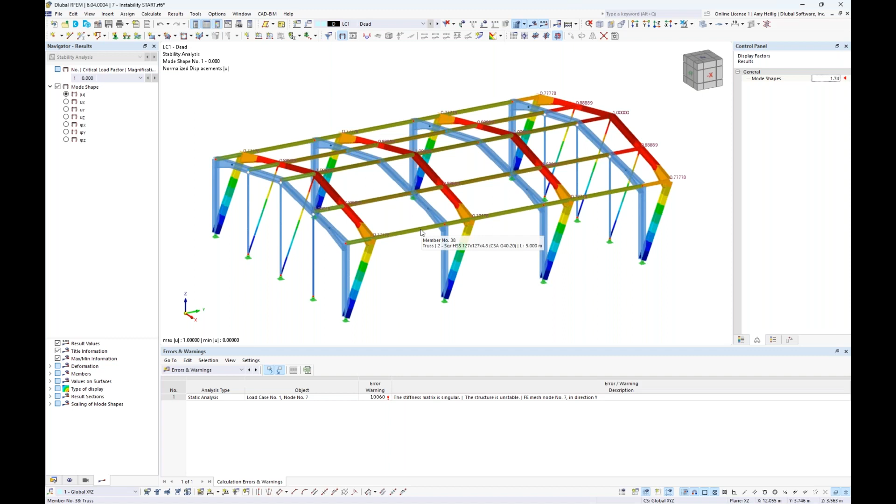And we will begin to see what the problem is here with our structure. If I increase this mode shape deflection, we see that the structure is just free to hinge about its own axis in the global Y-axis, and that's simply because we have pin supports everywhere. These member ends are connected with pinned moment ends, so we have no lateral bracing for this steel structure.

In order to resolve that, let us create a few members here. I'm going to draw a new single member. The member type will be tension only for this lateral bracing, and the cross section will be a single angle that I've already defined in the model. I'm going to turn this into wireframe view where I can snap to this particular node, and the program asks me to clear my results, no problem. The program automatically detects these snap points to allow us to create this cross bracing for the last bay shown on the right.

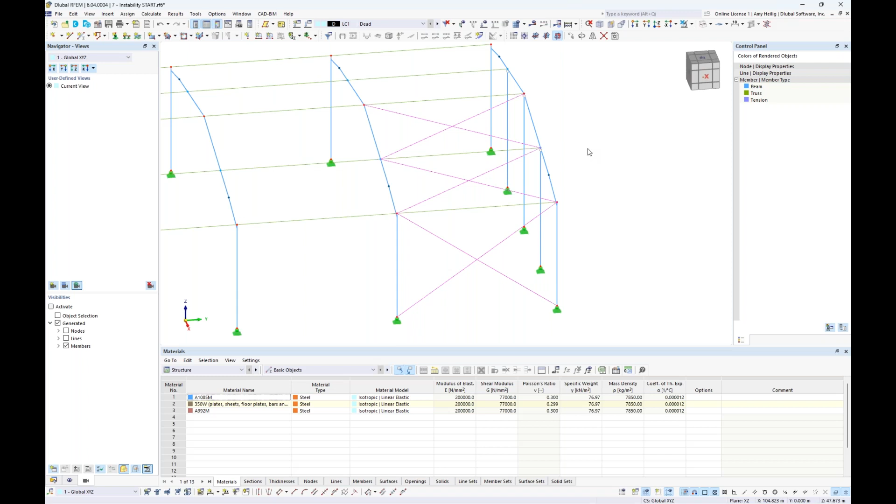Now that we've modeled in this lateral bracing on the right-hand side of the structure, I can hold down my control key to select all of the elements. I can mirror this to create a copy about the YZ plane, selecting my mirroring point at the top of the structure. Now we should see this lateral bracing applied at the left side of the structure in that last bay.

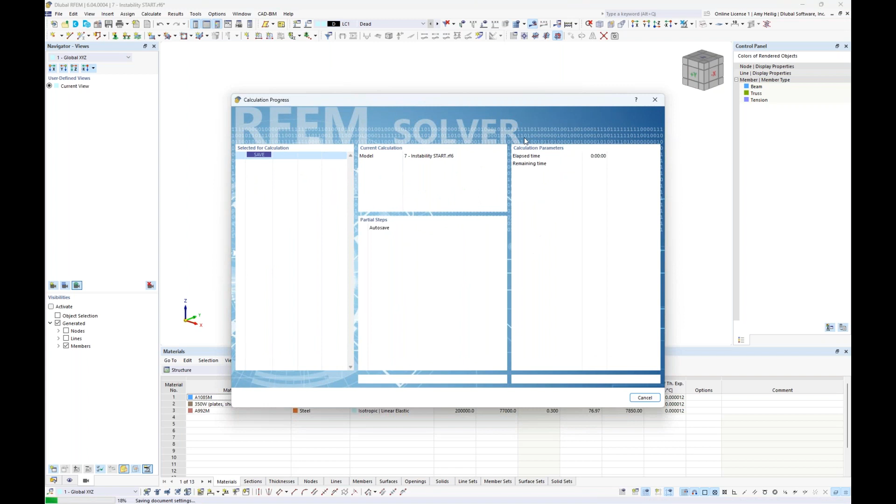So what we would hope is that we can go into our load case 1 to rerun this calculation. We'll cycle through the static analysis, and unfortunately what we'll find again is another instability. When we take a look at this new instability error, it tells us that the instability occurs here, where this red arrow is, around the global axis X. So again, we've kind of ruled out any modeling issues.

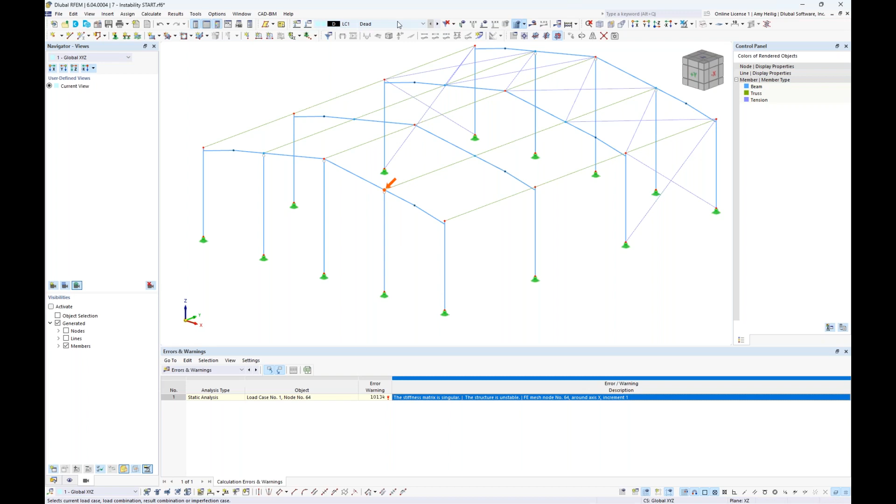We're not sure what's going on, but I've left that structure stability add-on active for load case number 1, so I can simply turn on my results here, and sure enough I see what the issue is. It appears that this column is not connected to the rest of the structure. In this scenario, this red arrow is certainly helpful for identifying where that modeling error occurs. When I turn off the results and zoom in in wireframe view very closely, sure enough I see that these two nodes are not connected.

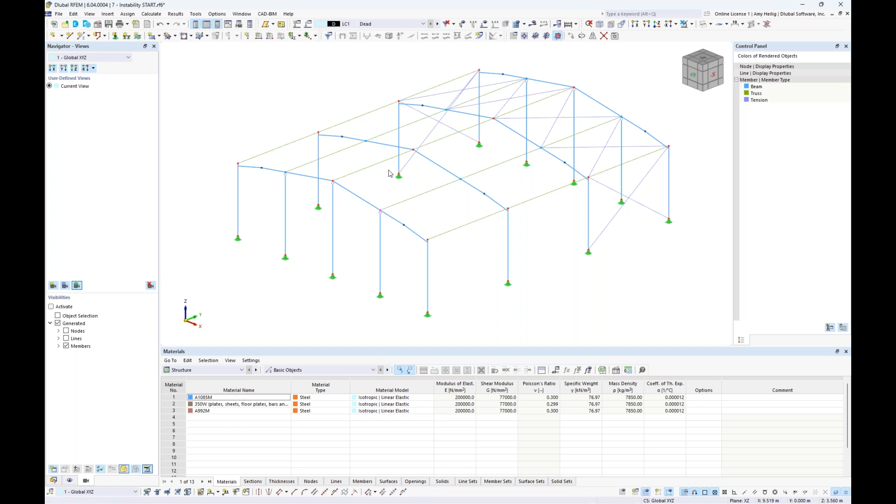So I can simply take this node and drag and drop it here to this other node connected to the frame. What we should see now is, hopefully, the dead load will solve and we have no more instabilities for this load case. So assuming now that everything is solving for first order analysis for these first few load cases, we want to drop down to a load combination.

I'll start off with this load combination here, dead load plus snow load. Keep in mind this is always run by default according to a second order analysis. Again, my load cases solve fine, we're moving on to load combinations. So I'm going to carry out this calculation, and the program will attempt to run this. What we should find here is our third instability.

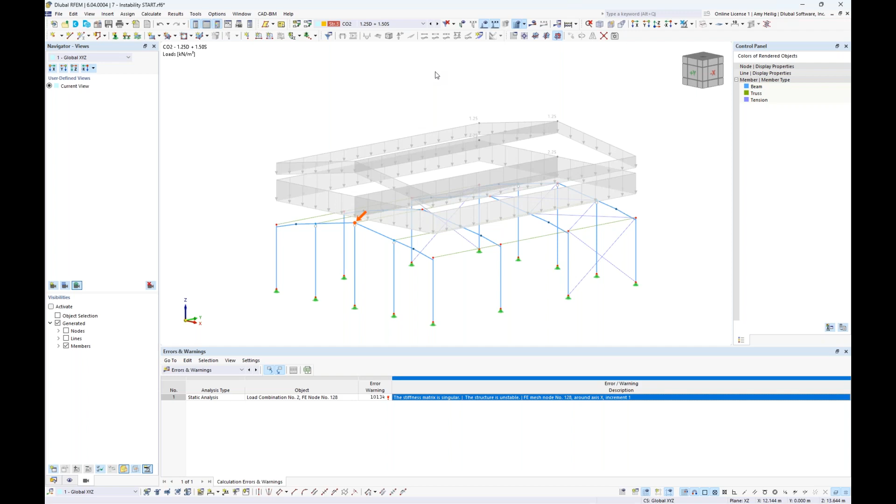This time we can see the structure is unstable around the global X-axis. Now, when I turn off the display of the loads here, we've really ruled out any modeling issues, because those load cases under first order analysis solve perfectly fine. So we know that nodes are connected, everything is fine there. What I would suggest doing for instabilities under load combinations, since these are by default solved according to a second order analysis, is to change this to a first order analysis.

In addition, we can activate this structure stability add-on, but I'm going to go into my definition type and carry out the standard eigenvalue analysis with 4 eigenvalues to solve for. So we would hope then that we'll go ahead and solve load combination number 2 here, and that the first order analysis will solve okay.

And actually what we see here immediately is that no errors are shown. The structure solves just fine under first order analysis. So what could possibly be the problem then with second order analysis?

Well, I toggle down to my stability analysis results, and we immediately see what the issue is. The 4 eigenvalues that we solve for have a critical load factor of 0.67 with the relevant buckling mode shape for these very slender columns shown here.

Anything under a value of 1.0 is always a problem. This means that the structure cannot take on 100% of the applied loads in load combination number 2 before it's going to fail, as we see here. If we take a look at the other relevant mode shapes, it really has to do with these slender columns.

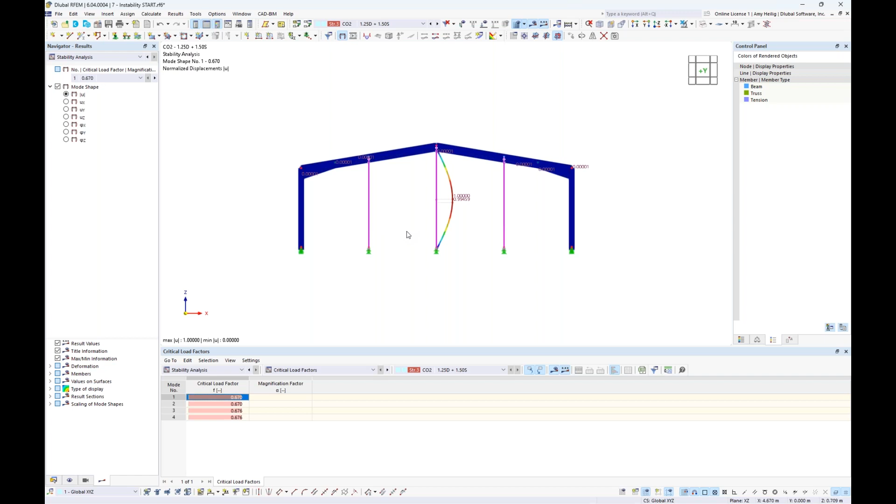So clearly we need to make a change to our model because it cannot take on the applied loads. So we're going to select all of our vertical columns that are very, very slender. We'll go ahead and double click them, and under the section, we're going to modify this. Instead of an HSS 51 by 51, we'll change this to an HSS 127 by 127.

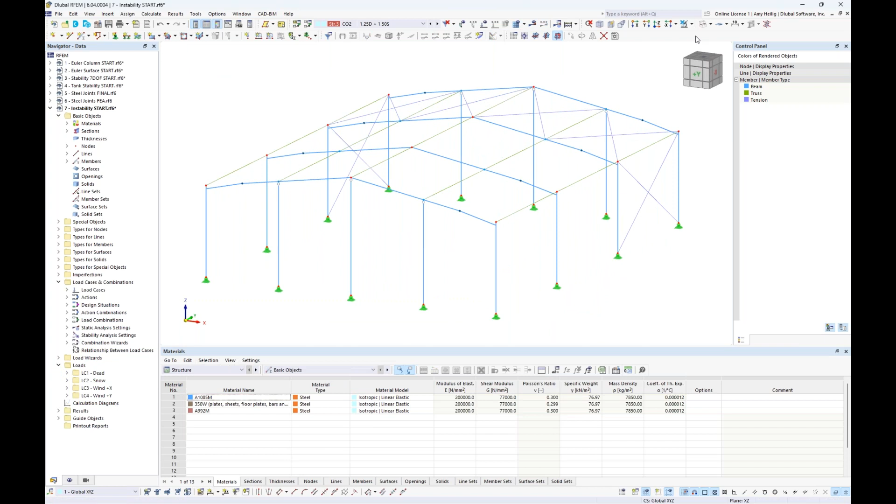So when we click OK, let us take a look at the model. And even in the rendered view, I think we can all agree that this looks like a much more applicable section than that very slender HSS.

So I'm going to go back to load combination 2, and I'm going to change this to a second order analysis, which again is what we would hope to carry out considering P-delta effects. We can leave the structure stability add-on active here. And now, hopefully, with these more robust sections, we should see the full static analysis solve for second order.

And sure enough, we see the calculation carry out just fine. We can turn this into wireframe view. So we see all of our static analysis results. And we also toggle down to the stability analysis.

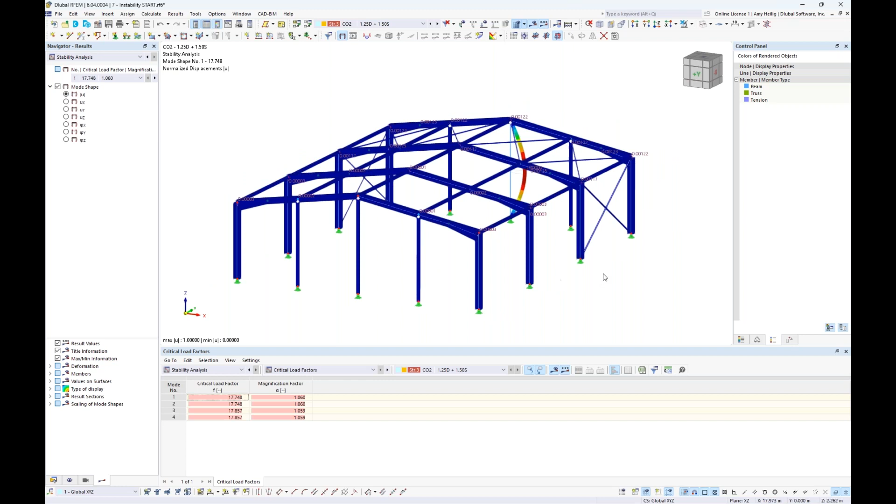Now looking at the first 4 mode shapes, we still have buckling here of these columns, but the critical load factor is now 17.748. So we could probably say that this failure of these columns is not a concern because the structure can take on 17 times the applied loads from load combination number 2 before we would see it fail, as shown here within this first mode shape.

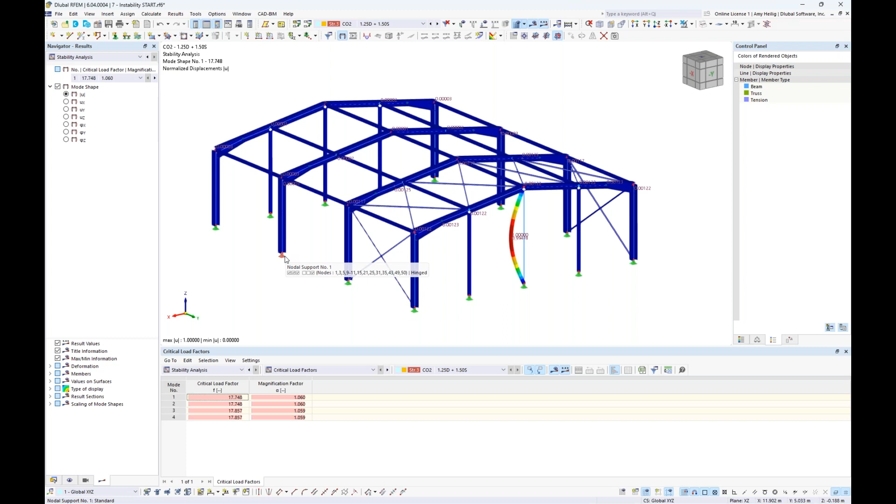So again, the structure stability add-on not only can carry out the buckling analysis of our structure, but also we can utilize it to help us with those modeling errors and instabilities.